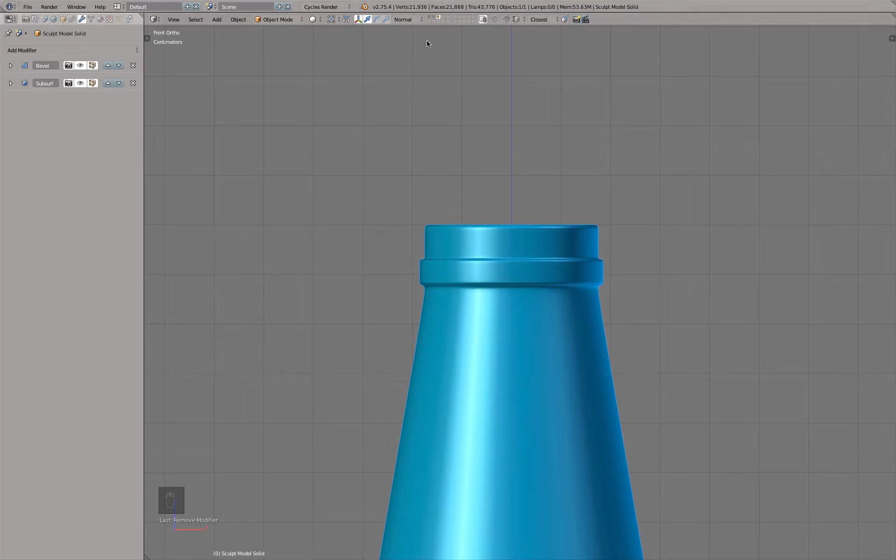So let's zoom to where our cap is, and let's actually turn on, for example, layer 1. Actually, we can just go to layer 1. So I can, for example, see where all the horizontal lines are, because essentially the cap has to flow over it and fit on the bottle.

So what we can do actually is, for example, start by copying out one of these rings, because then we have already the correct height, and then we start adjusting the scale, make another copy, move it around, and then step by step actually build the same framework for the bottle, just for the cap.

So I start actually with this ring. I can press Shift D and then press Escape, so I do not move actually the ring. Press M and then move it to the next layer below. So I simply have my wireframe model for the cap on a different layer than where the bottle is. So this lower ring, for example, is already perfectly positioned where it might be. We'll see later for the fitting.

But for the moment, let's actually change first the size. So this one, for example, should be roughly 38.2 millimeters and 38.2 millimeters. Okay. And then we can make another copy of this one. So Shift D and again Escape. And we change the dimension this time to 40.5 millimeters to 40.5 millimeters. Okay.

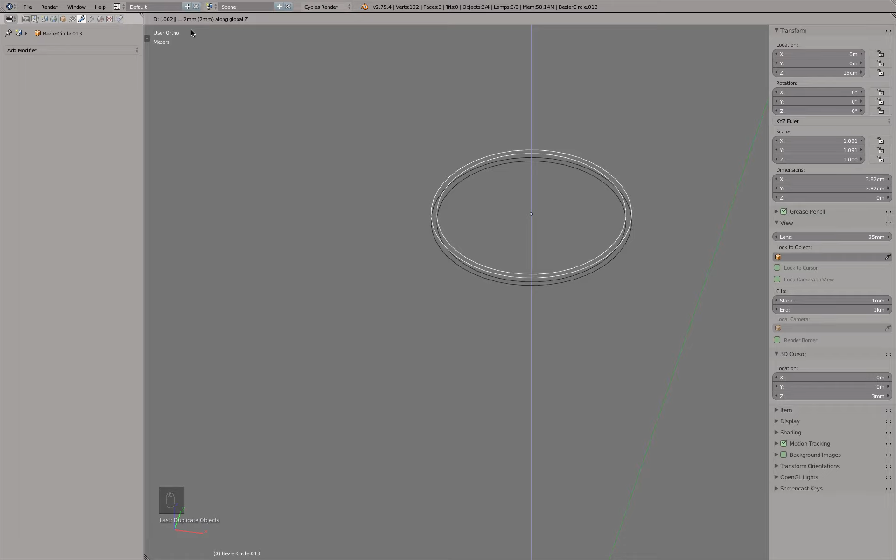Then with Shift and left mouse button, we can select both. Press again Shift D and Escape. And then actually we move this roughly 2.3 millimeters up. So G, Z, period, and then 0, 0, 2. So just pay attention to the values you see up here. Because a meter is the main unit, and we want to move it up 2 millimeters, you have to type in period 002 and enter.

Perfect. Let's go into side view. You see that this is kind of like the bottom part of the cap. Now, this ring I selected right now, we can make another copy. So Shift D, Escape, and then, for example, this one we have to move up.

Then the whole object is 10.8 millimeters high. This one is already moved up 2.3 millimeters, so we have to move this one up 7.5 millimeters. So G, Z, and then 0, 0, 7, 5. Okay, so let's double check.

I'm going to select this lower line, Shift D, and then Z dot 001. No, actually, this is 1 centimeter. Oh no, actually, yeah. And now we can see this one got miscalculated. Wah wah. Simple math failed, so not a big deal. We can simply move this one up.

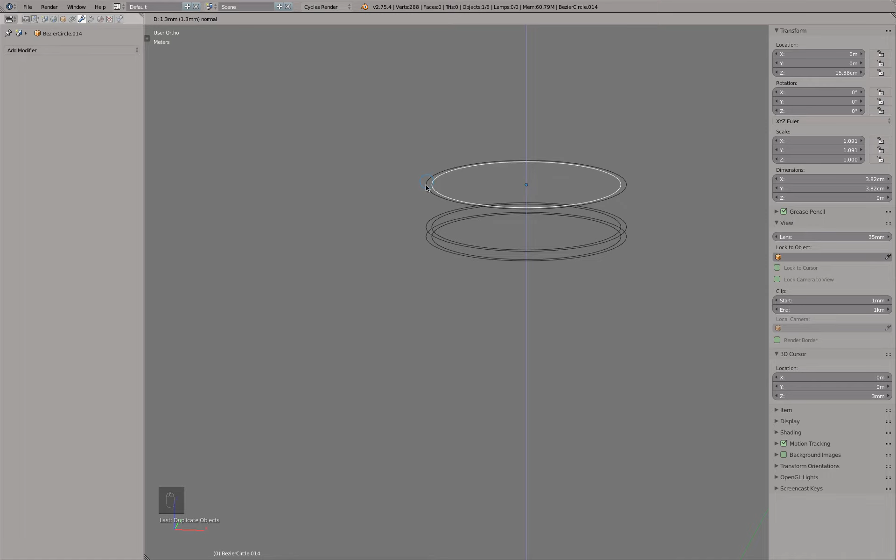So we have actually vertex select turned on. I click on the blue arrow, move this one up, move my mouse to this other ring, hold Control key, move my mouse till it snaps to a point, and then I release my left mouse button. Then I can release the Control key, and good. I can select this one and delete it. Okay, perfect.

So we have, for example, up here another small ring that goes in, and it has a dimension of 30 millimeters. So again, Shift D, Escape, and then here we type in 30 millimeters. Okay, and this one goes down actually a little bit. So let me measure the distance, which is roughly 1 millimeter. So again, Shift D and then Z, and now we type in -0.001. So you see it goes down 1 millimeter.

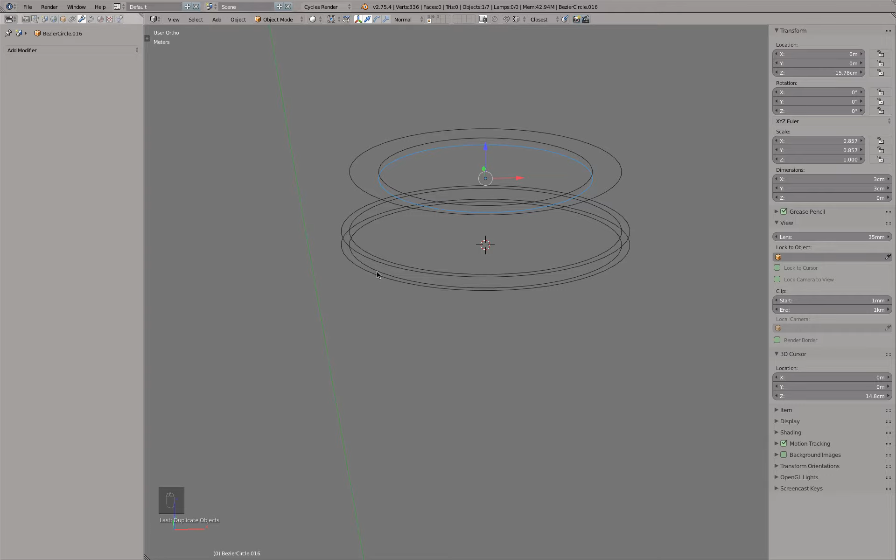Okay, so this is again kind of like the framework for our ring. Think about those like hard edges we can use as a reference to shoot for. Now we have to build at least one cross-section view. We can select one of the lower rings and then Shift S cursor to selected, so that my cursor is right at the same horizontal level and also centered at the ring. So when we create our next object, another spline, it will be perfectly centered inside the ring.

So now we can go ahead, Shift A, curve, and let's add a Bezier. Zoom out a little bit, go to top view with 7, Tab, select everything. Actually, this might be good to show two different ways how we could scale everything flat.

So I could select this one, point select is turned on, G and Y, move this one down, hold my Control key, move my mouse to here, and you see it snaps along the y-axis to the same height where this point is. Okay. I could also, in object mode, and you see here this one is 22 centimeters, simply say 0, then this is actually artificially compressed. See the scale factor is 0 there, and then I go to Object, Apply, Scale. If I go into edit mode, it's also flat.

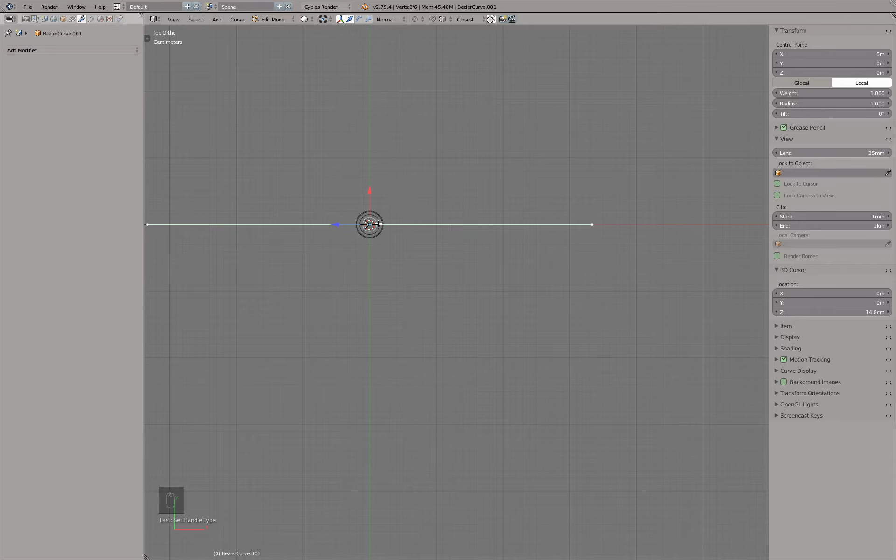The last step with V is the one I wanted to use anyway, because I want to work with linear lines first. So my 3D cursor is still at this position, and I can click on this point and either inside transform control points write 0, so it snaps to the same location where I positioned my cursor, or I could say Shift S, selection to cursor. There. Then this point I move in a little bit more, and then let's zoom in.

Let's focus on it, and here is a point on my ring, so I can click on the arrow. Also, you see I have normal turned on, and with normal the Z is always along this line, and then you have X and Y, and this all flips based on what setting you're using. So let's undo this one. So now I have global. Now I can move the red arrow till I hit this area, hold the control key, release my left mouse button, and it's snapped. But I really love working with the normal when I work with splines, so I switch back to this one.

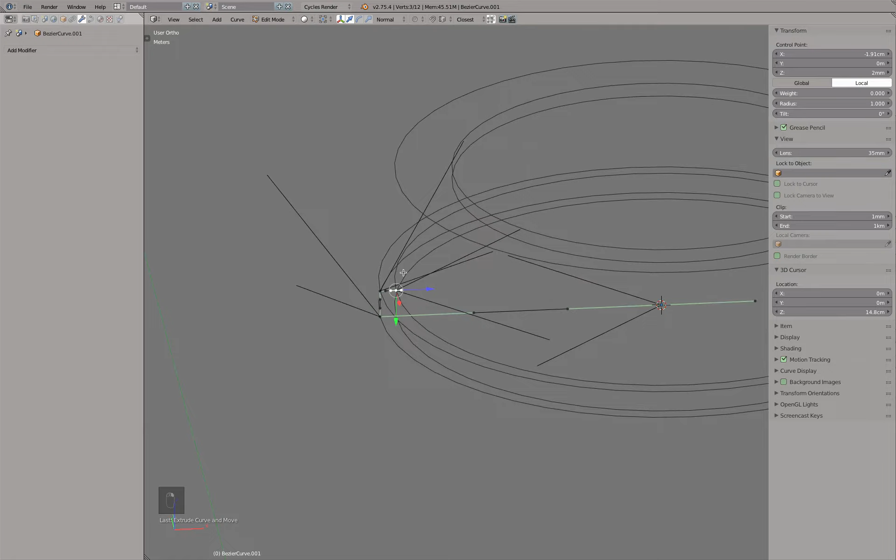Now I can press E and then Z, hold the control key and snap to it, and press E and X, hold the control key and snap to it. And this perfectly worked out because all these rings are either above each other or next to each other. And then one E and Z, hold control, snap, E and X, control, click, E and Z, control down. And now the next one should be where the 3D cursor is, but roughly here.

So EX. Now I could, for example, say SX and 0. Whoops, but I have to go first to 3D cursor. So I scale to this 3D cursor, but only along the x-axis, and 0 works. Or, because those are 2 steps, I could simply go to control points, 0, there. Perfect. Okay.

This one will have a small radius. So I could visualize this so it's a little bit more helpful. Create a circle. I think it is roughly a 2 millimeter diameter. So I could press F6. I have a different key mapped, so that's the reason why you don't see that pop up. And then I type in radius 1 millimeter because that's the dimension for 2. And then rotation 90 degrees, so it's flat on our screen.

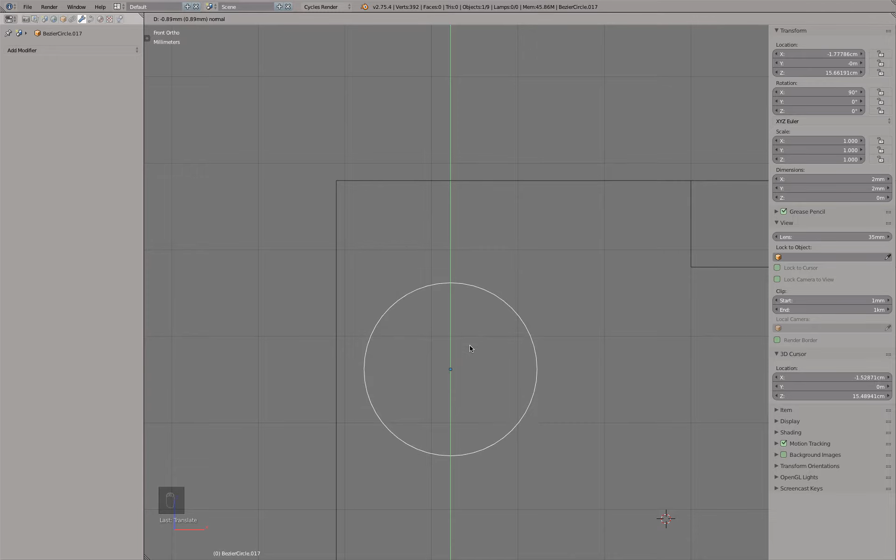Where is it? Where's the ring? Oh, 1 meter, 1 millimeter. Forgot to enter this one. Okay. And then I can bring this one into position. I press the Y arrow, hold the Control key, move it to this corner. It snaps. Press the X key, move my mouse to here, hold Control, and release the left mouse button. Then I release the Control key. And you see now we have this one positioned. This is very helpful because it tells me how I have to bend certain parts of my curve to get this result.

So I think now we can go ahead and start sculpting our profiles a little bit. For example here, this point I would like to move over to the right by 1 millimeter. Currently I can't really use the normal view. I could go to global and push it over by 1 millimeter. But while still with the normal widget active, I simply could write GX, so move along the x-axis, .001, 1 millimeter. Perfect.

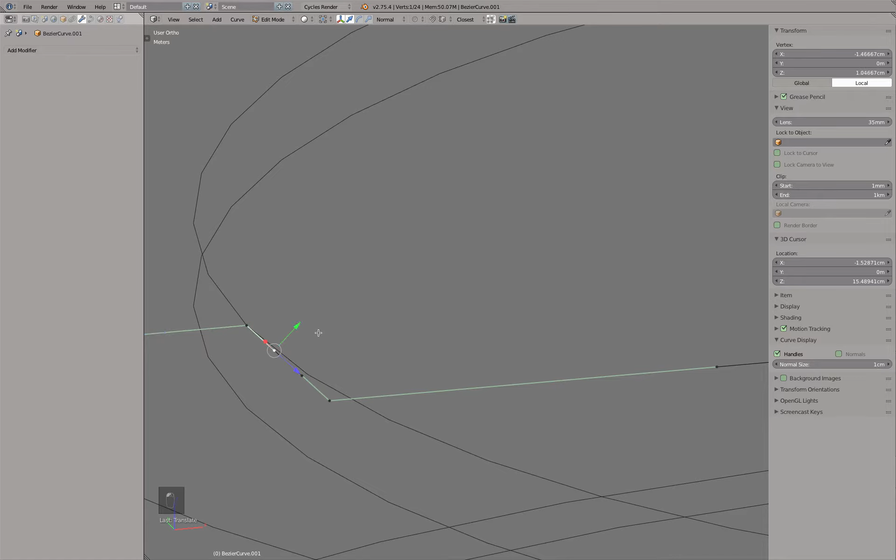These 2 points I would like to be aligned to those handles, because currently you see with vector we get linear transitions. And if I select this one and say aligned, you see it aligns it with the green line. What I can do now is I cannot move these points up and down, but I can drag them out further. But the way it looks right now is very pleasing. It's a nice S transition, so I keep it. Good. For example, here I would like to have a ring. What do we do? It's not really a big deal. We have to add another point.

So one point here, one point there, and then we also work with the handles to sculpt that shape. I'm going to select these two points and press W and select subdivide. You see, this added another point, and then this point I have to move right to where this position is, basically at the midpoint of this arc on top.

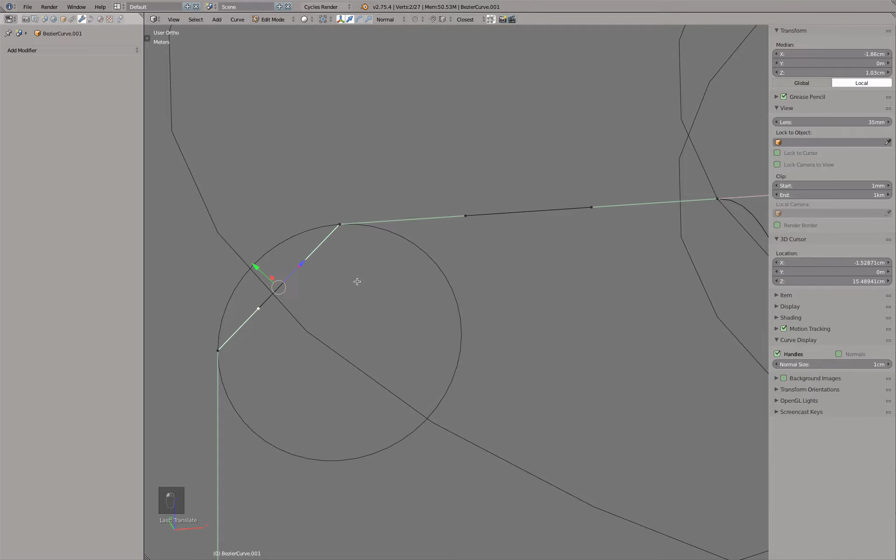So either G, X and then Control, and then G, Z, and hold Control and click. Perfect. And these two points, select, align. It's going to side view because it's not necessarily perfect yet. So I would like them maybe to come in a little bit closer. Oh, there we are. Maybe this one will tick up, maybe tick back. This looks good.

If, for example, you would like this to be more evenly spaced out, see, I was actually moving each one at the same pace. Let's see what happens when we press S. You see, because they're aligned, they have to stay aligned. With S, I scale them towards each other, but they can't really look at each other, so I simply scale them in or out. And it's pretty fantastic, it works with both at the same time, so I can nicely scale them and get this nice arc.

Really good, let's take a look down here. Actually, I made a small mistake. This one doesn't even have to be there, it actually has to go more there. So I need something circular, and then later the metal has to bend in a little bit. Let's see how we do this.

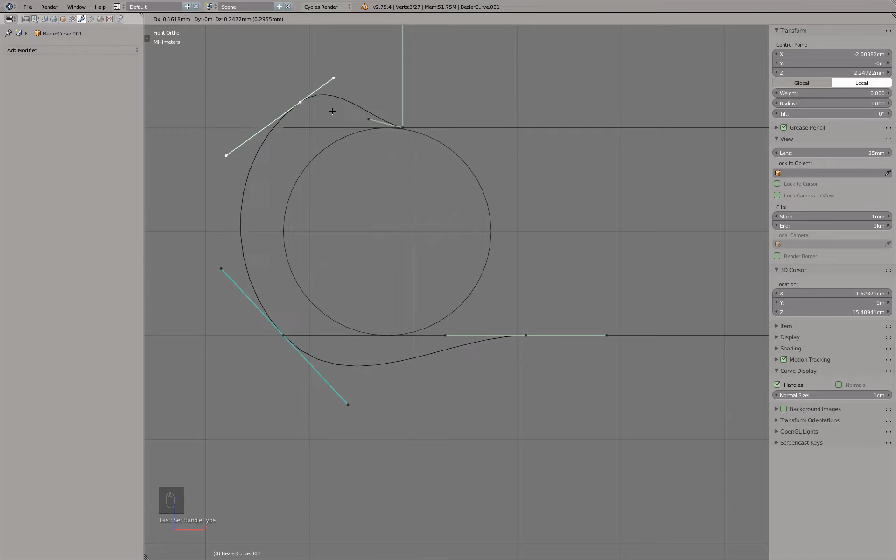I'm not going to make a copy, I'll just leave it. Okay, so you and you, maybe, let's say automatic. What does automatic mean? You see, actually the handle size adjusts automatically, you can only move the point, you can't really do much with the handle. Obviously, if you do, then you override the type of the handle.

This one here, I'm going to set to be aligned. And then this point, I slightly move up. Then I try to see maybe where I have to put these points, so I might actually get a nice kind of rotated circular shape. And it could work, or the automatic tool here doesn't work as I hoped.

Not a big deal, so let's override the automatic to align, so I can actually now rotate everything. This one here I push out a little bit, this one I push up a little bit.

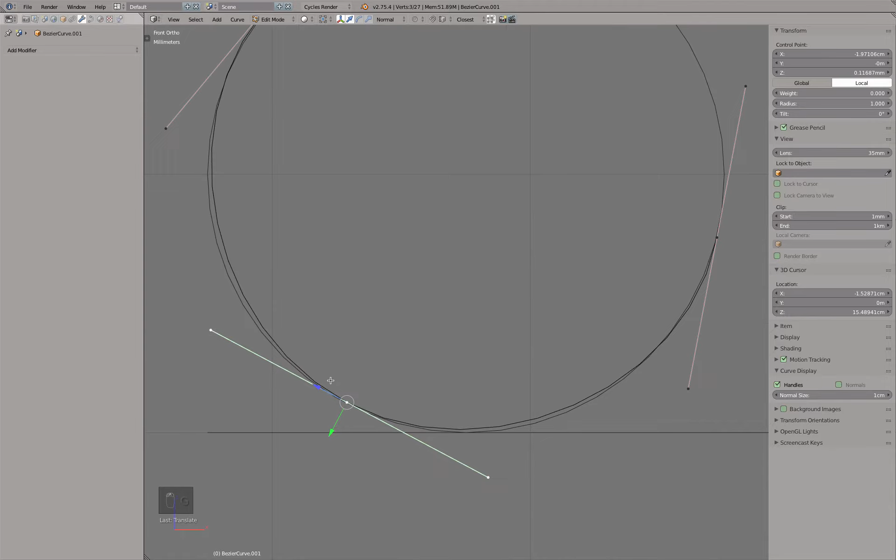No, this is a metal part, for example, that would be bent by a shape, so this will be machine made. We don't have to be 100% super accurate, we could simply maybe suggest the shape, like this. Okay, that doesn't look too bad. Let's preview the result.

With a solidify, with a screw command. Let's move this one actually, no, let's not move it to a different layer because it's still the profile. But with Shift H, we can hide everything else, and then we only see our cap. That is actually pretty good. So then we can turn off the screw modifier and remove it because the result is pleasing. With Alt H, we show everything again, and our first step, crafting the layout for the profiles, is done.

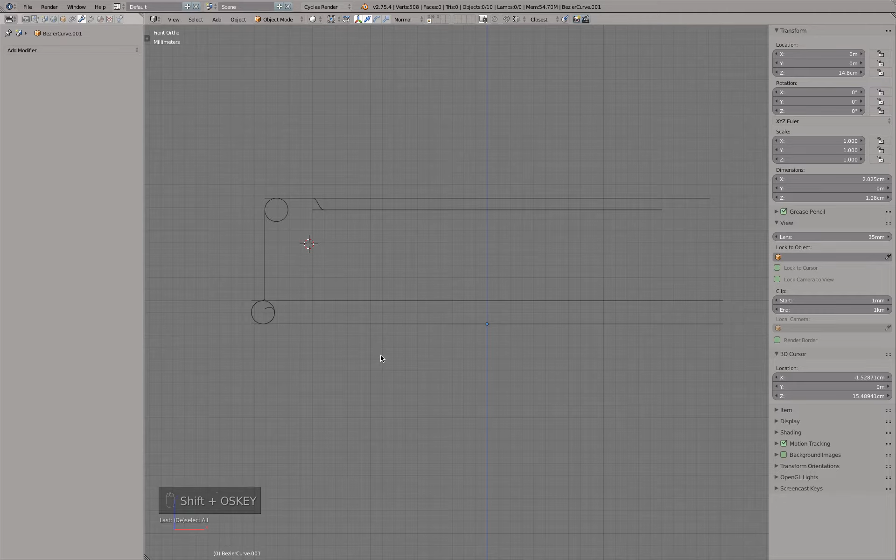We are now ready to generate the polygon model for more sculpting. Again, the reason why we do this is we can use splines to quickly create nice shapes and flows, and then even use the screw feature to, for example, lathe it around the z-axis 360 degrees. But we can't really locally sculpt on those objects because they're not really there, they're more interactively generated.

So we have to rebuild this one. Or actually, what we can do, I'm going to show you this in contrast to the way how we build the model. We can also convert this object already into a polygon model. So I'm going to press Shift D, Escape, M and 4, to make a copy. With Escape we do not move it, and then with M and 4 we move it to layer 4. And we have this object selected.

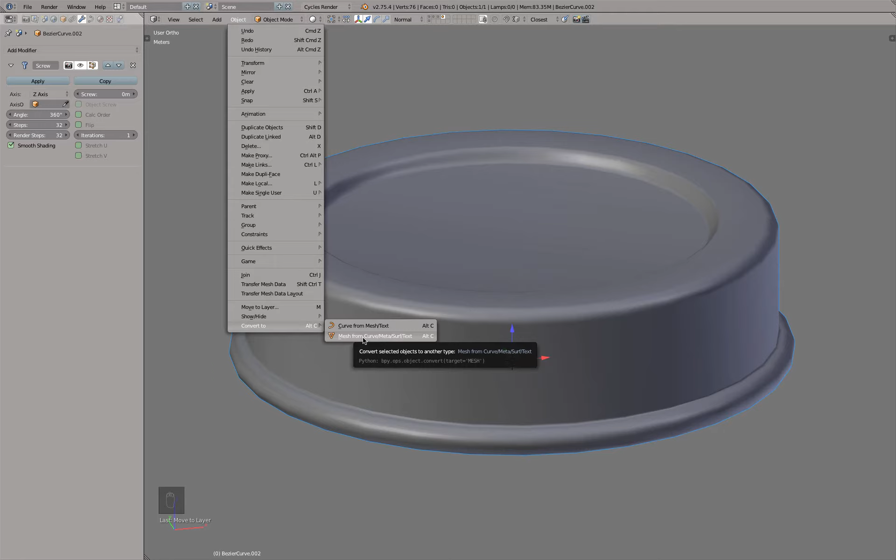So, for example, here I type in 32 and I go to Object and say Convert, and then Mesh from Curve. Let's turn this one off for the moment. Okay, and then go into Edit mode. There's our design.

It doesn't look too bad. The problem, however, is this is actually very, very dense, and you see also here, this is very dense. If at one point we want to change a small part, you have to work with all those cross sections and evenly adjust them. That's possible, but it's going to be very labor intensive. So this approach doesn't work, but that's not a big deal.

Simply let's undo everything. What we have to do first is I'm actually setting the levels to 6, because this is going to be again the low resolution I only need for my subsurface modifier and later in T-splines in Fusion to simply get a nice circular shape.

And then we go to the curve data, and this one we actually can set to 2. From the top you didn't see much, but let's take a look at here, and you see when I set this to 1 or 2 or 3 or 4, you get more steps. So this is similar like the subdivision view levels, but just for NURBS surfaces.

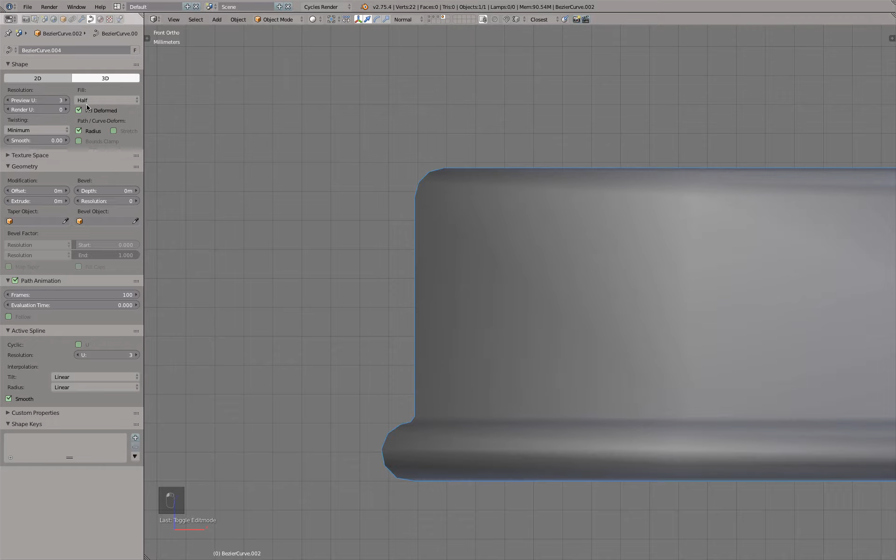And this result, for example, with 2... maybe let's go with 3. That might be not too bad actually to work with.

Okay, so now actually we can go to Object, Convert, or you press Alt-C, and then let's go into Edit mode, and there you see what we have. Okay, not too bad. Good. We have to add a subdivision surface modifier, maybe level 2 or 3 for the preview. Let's turn on projecting the cage onto the mesh, and let's take a look at the side. No, doesn't seem to have any issues.

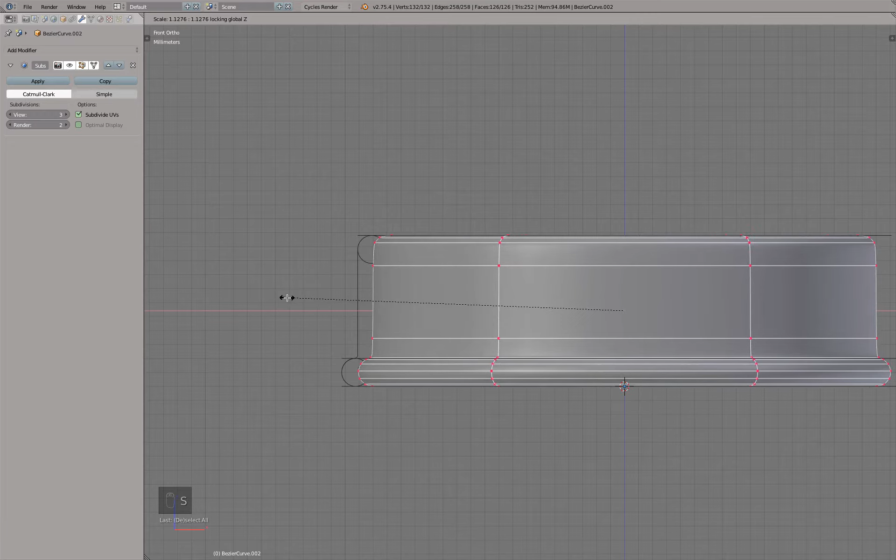On this layer, let's turn off the screw modifier for the curve, and then let's make an overlay, because we will see that this object actually shrank, and that is because with the subsurface modifier we only have 6 vertical cross sections. It simply will shrink it down dramatically, but this is not a big problem. We can simply select everything, and then we press S and Shift Z and scale it out so we get a close match again.

Okay, perfect, or nearly. So you see actually that it doesn't necessarily fit everywhere as good, and I have to scale all these points right now, so possible, but this might actually be a little bit too much work.

So what I simply do, I make myself again a copy of the original one, and then set this back to 6. So view this one, and then here we say 2 in this case. 3 was just a tick too dense. And then convert. So now we have a lot less points.

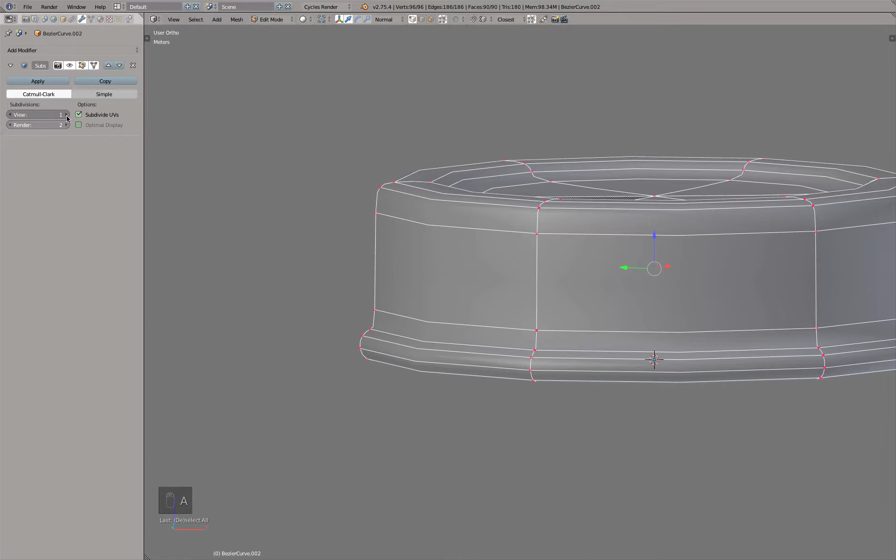Let's show this layer as an overlay. A, A, S, Shift Z, move it out. Yeah, so now there we have less points actually we have to take care of. Okay, so what we can do now is, as you can see in a low polygon cage, is vertical, but if we project it onto the subsurface surface, you see this gets crooked.

Not a big deal. When you have more than 2 points in a line, it will actually straighten the surface. So you see if we add, for example, a loop cut and a loop cut, this area gets straight, and then there it starts bending out, and then there it bends out. So let's go down to this part here. Let's maybe select all this and see what we can do to maybe help a little bit.

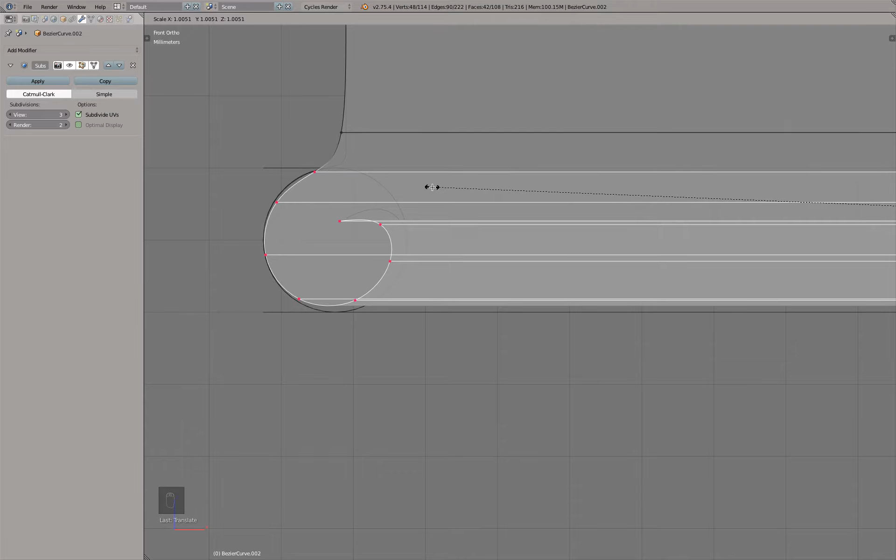So G and Z to center it a little bit, and then S, yeah, when we just scale it out a tick. Actually, those, for example, we scale inwards. Oopsie. Obviously not this way. Yeah, there and there.

So I select those edges and then I go to mesh, select, and edge loops there. And then S and I shrink it back there. And for example, I can select this and this and then do the same, select the loop. And G and Z, for example, move it down.

Okay, this is actually obviously not 100% accurate, but this is a machine part. And all we do here is quickly make a concept. And for this, actually, this result is pretty decent.

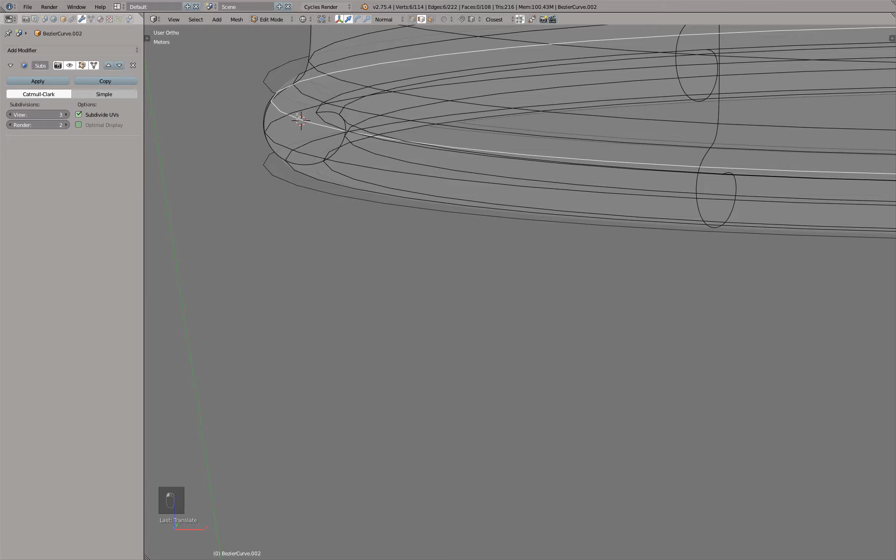With Alt left click, you can also click on the ring, or is it Control left click, and then G and Z move this one up. For example, let's take a look at how these points are there. Maybe this point, actually, this complete loop I remove. Curious how this looks now. You see that will be a bigger transition.

That's fine. But now I can take this loop and actually push it down a little bit. Take this loop, push it down a tick. Take this loop, push it up a tick. There, then we get a nice soft transition. And maybe this one we scale a tick there. And this one maybe move up if we want to. And this one we can G and Z move up a little bit.

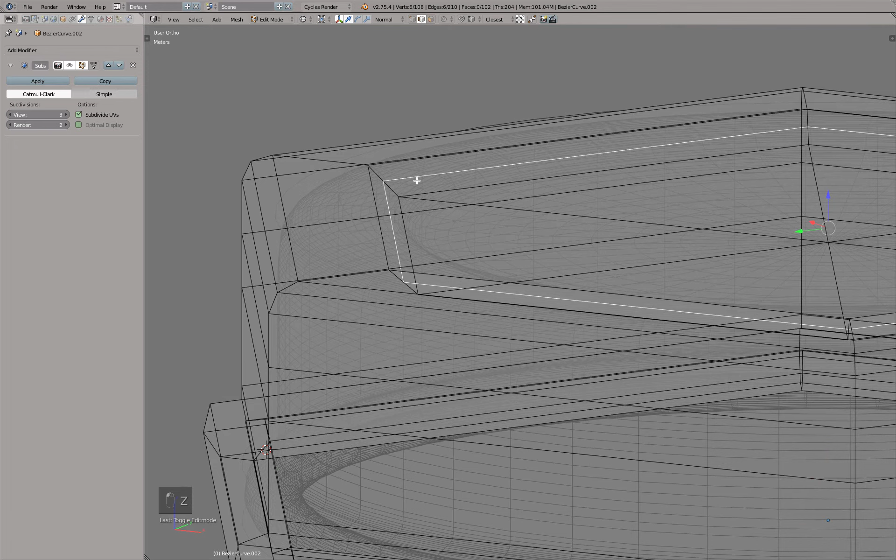Yeah, and you see that wasn't too difficult to quickly adjust. Let's take a look at this area here. So we have this midpoint. We can actually remove it, because what we simply can do is we add a small loop cut here with Control R onto this line, move it in there.

Obviously, if you do this, you want to try to make those distances kind of equal. Think about those as fillets there. Now we have a nice transition there. And this actually does not look very circular, so this is not very pleasing. Let's see what we can do.

I'm going to select this edge and completely remove it. Select this edge there, and then G and Z, move it up till we hit this point there. Select this edge, clean it out. Okay, let's take a look. And maybe this line I move up a little bit.

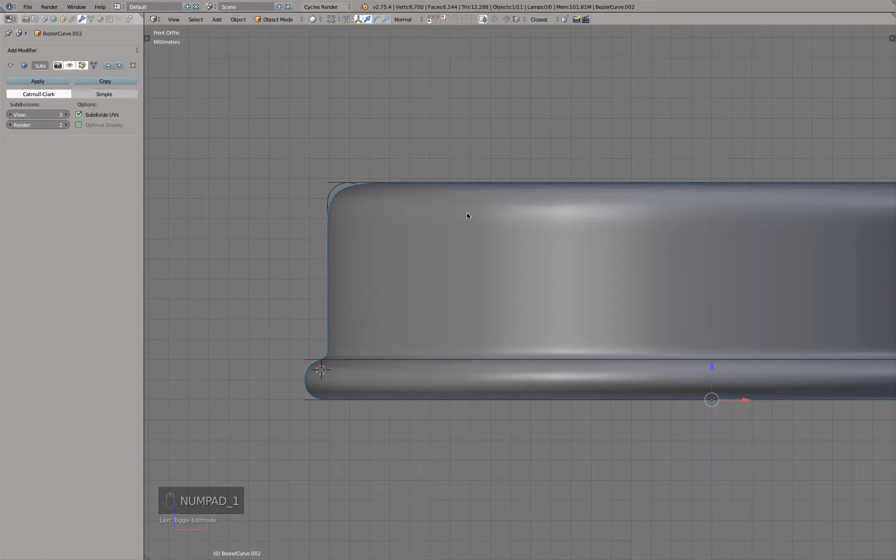So there are two ways now. We could either try to sculpt this part. We could select this edge, and then with the Bevel command, so this is Control B, and then you have to move your mouse away a little bit. And then with the mouse wheel, we can add subdivisions, more steps, to sculpt this a little bit rounder.

There, okay, and then with F6 we can open the dialog. And for example, here we could type in maybe for profile 0.6, so this maybe looks a little bit rounder. Up here, maybe I would like to have 2 loop cuts to straighten that top surface.

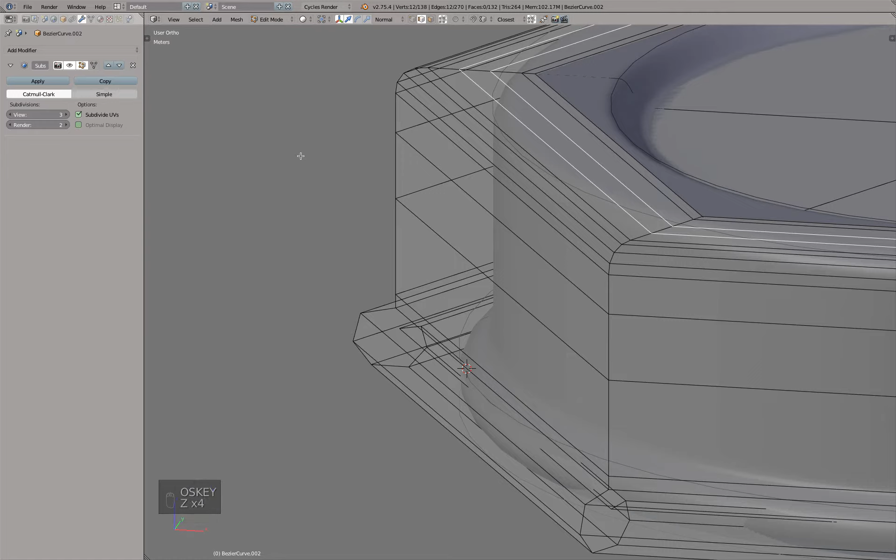Let's take a look at before. You see how this actually dips down, and then with the loop cuts it's a little bit straighter. Okay, so that's one way. But the problem is I have now added all these loop cuts or subdivisions, and a smarter way would actually be select this edge and...

Let's set this weight to 1, and then before we do the subdivision, we add a bevel modifier, but just for the weight, with 1 millimeter, maybe 0.6 profile. You see, this is actually the same command like when we add it directly to the mesh. And maybe 0.8 millimeters, no, 0.9 millimeters, if we want to hit that profile pretty closely.

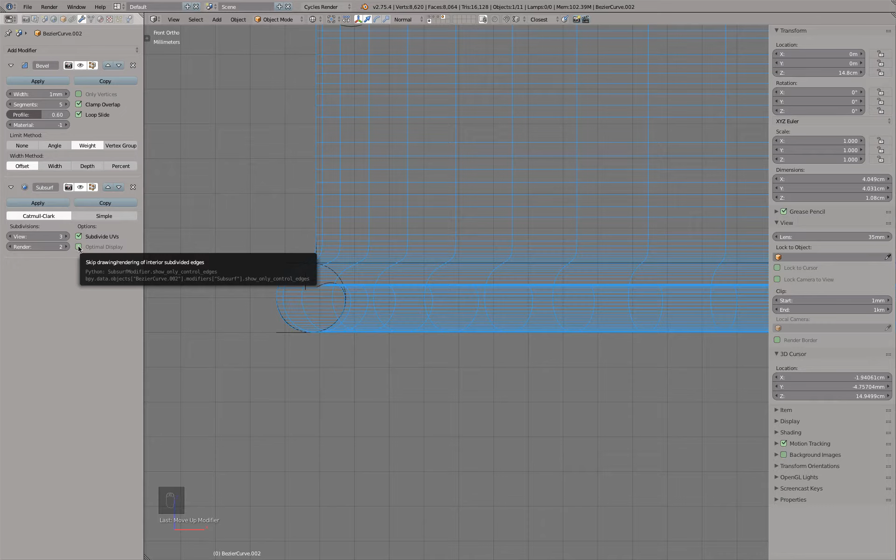1 millimeter. Yeah, okay, this looks actually pretty good. So, as a last step, since this mesh looks pretty dense, we can click this option here, optimal display, and then it shows you less wire lines, so it's a little bit easier on your eyes.

And now we could add a solidify modifier to give this part also a thickness, maybe 0.2 millimeters. Let's take a look at where this one is being inserted to. Yeah, so this actually goes to the inside. You see here with offset, this grows to the outside, this grows into the inside. Let's check those.

Yeah, this is actually, ignore this for the moment, we will fix this when we need to. This is, however, actually a pretty good result. And there is actually the problem: these points actually are not joined. You see here they overlay.

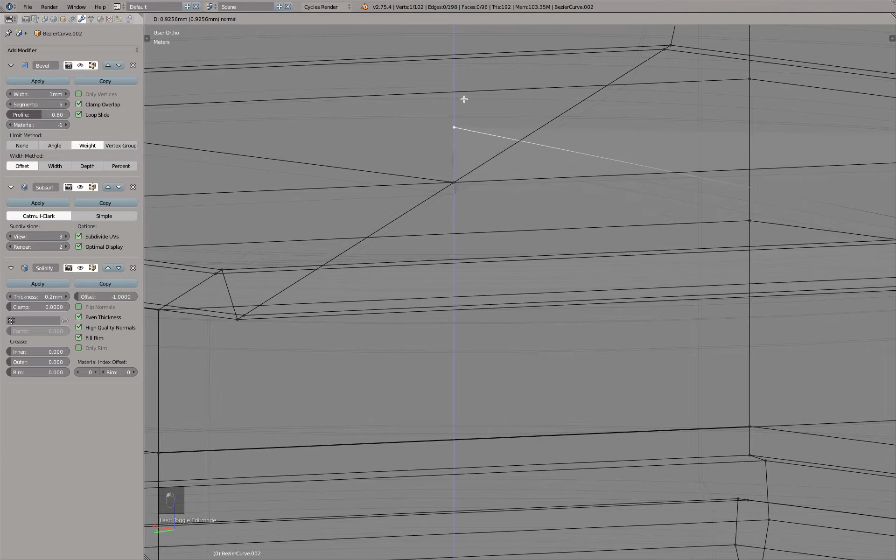But for the moment this is fine, we can keep it this way. It's exactly the way how I want. I will come to this at the end of the project to optimize the mesh a little bit. Okay, let's keep the cap this way, and then we can save it.

But before we do this, let's make one last check. We have to see maybe the height position. So we see here the curves we created are all a little bit too low. Now we can select everything, go to the bottle, and move this one up. And then I pay attention to where's my bottle and where's, for example, this arc. Should be maybe somewhere here.

There will be a little bit of compression material in between. And there we are. So I think this is pretty good right now.

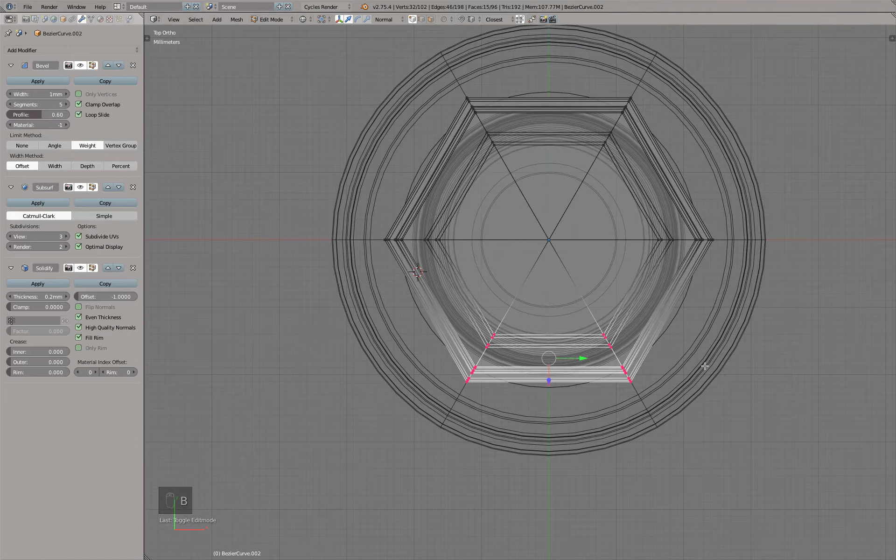If, for example, we would like to see in edit mode half of the model, we can select this part of the model for the cap and press H to hide it. And then you can quickly see kind of like a cross section. Looks pretty good. Okay, Alt H to show it again. And that's it.

At this point now we can go ahead and start working on the threading. Let's go back maybe to here for the moment. And I simply select this ring, Shift S cursor to selection, so I could quickly position my 3D cursor to there. And then let's go to the bottle so we can see it from the side.

And I shift click layer 5, so I can see what's on layer 3, but I work on layer 5. And I'm going to add a plane, and then sculpt it into the shape I need for the threading. And then we're going to use the screw command for the threading. So Shift A, add a mesh.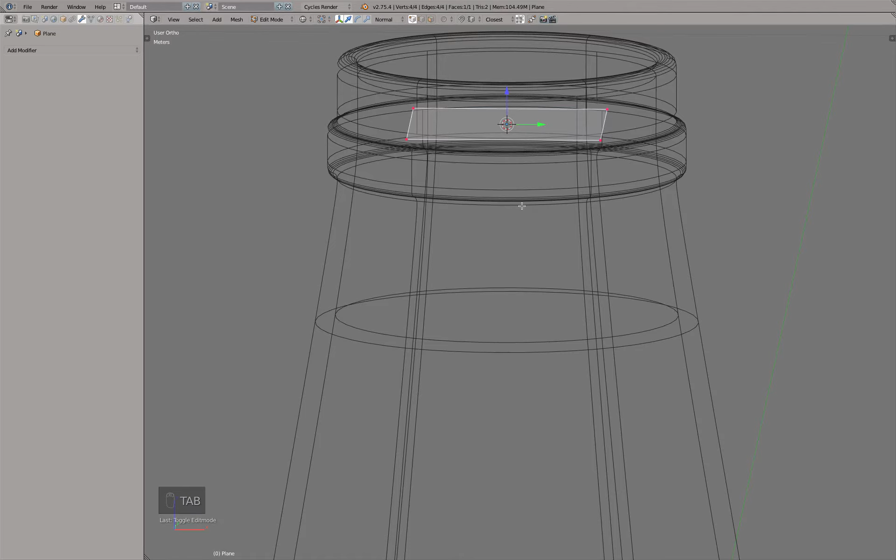And this plane is going to be very big, so you can press F6. Or alternatively, you could also go to the tool panel and, for example, down here type in 1 centimeter there. Okay, and there is the plane. And then I could press the tab key and, for example, RX90 and rotate the mesh.

But the mesh is pretty big, so the threading is roughly 2 millimeters high and maybe sticks out 0.5 millimeter in this design here. So to do this quickly, because this is more or less a squarish format, we could just go to Z in object mode, type in millimeters, and maybe dimension, we type in 0.5 millimeters. Now, because we have a scale factor applied, I don't want that, so I go apply scale.

Okay. So why did I do this? Very easy. I can go to edit mode, and for example, move this one out to there. And then I see, for example, when this is 0.5 millimeter, how far does the threading stick out? And another 0.5 millimeter then actually already reaches this cap. So maybe in my case, instead of making it 0.5 millimeter, I actually will make it maybe more something like

0.75 millimeters. So I can select these 2 points, and then I press GX, a little bit of math. So currently 0.5 millimeter. I want to add 1/4 millimeter, so 0.00025 minus. And if we measure this distance, it says 0.75. There you can measure the distance, and this is also 2 millimeters. Okay, good.

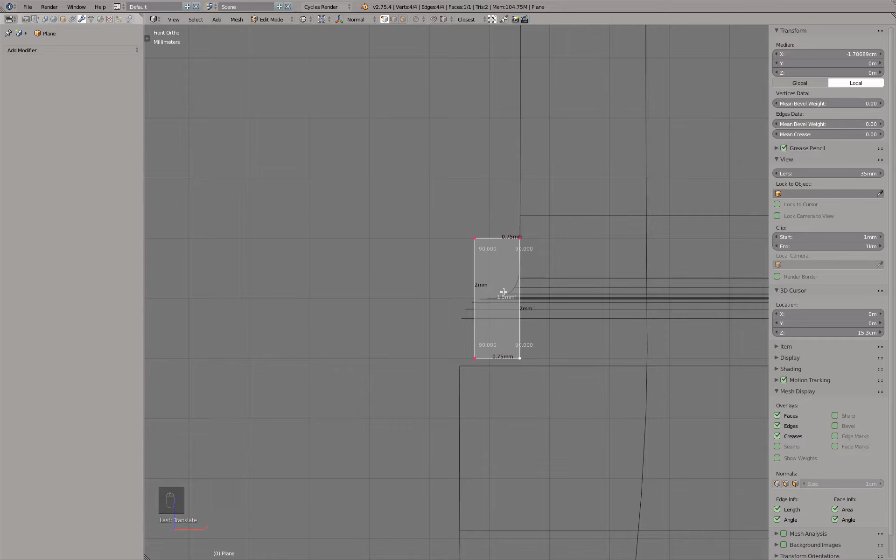So you find the measurement tool for linear lines, for example, inside the mesh display, and you can just click on 2 lines and then it measures it. You could even, for example, measure angle and, for example, the area of a face. You see all those are 90-degree angles. So it's a pretty nice, good tool.

Okay. So in object mode, then I move everything up for the moment to there, and I'm going to do the following. I'm actually going to make a copy. So Shift D, and then for example this edge I might actually remove. So I keep this maybe as a visual reference, and then you see there are 2 objects now. So the one that looks like a C,

and maybe to make everything a little bit easier to distinguish, I select all these points and then I press Y. Y is actually the split command. You don't necessarily see much of a difference, but if I click now on an edge and then press Y there, and then when I press S, you see you can actually scale those lines apart. So here I scale those S and X along the X-axis, and you see now this more or less looks like a nice layout. So I can use those as guidelines. So I always know where, for example, roughly my 0.75 marker is.

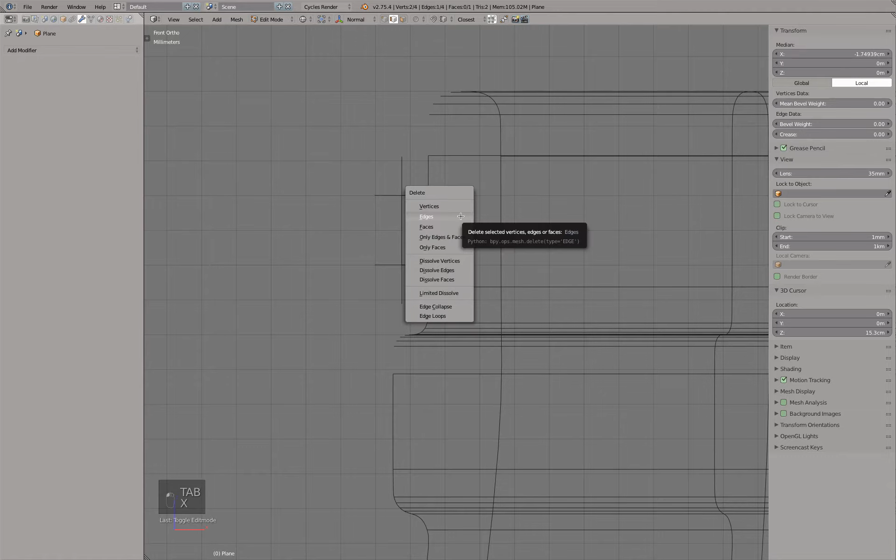And then I can go back to the first object I created. And for example, this edge, we also can delete this edge. For example, I could maybe scale down a little bit so this tapers a little bit. Yeah, so let's start this way. Good.

So to create a threading or a thread, we basically can use the screw command. So it looks a little bit cleaner, let's set this for the moment to 64. And here is the screw command. So this basically now decides the vertical offset. You see 1 millimeter, so half actually the height, 2 millimeters the full height, so it's like a 360-degree spin, and then you see it stops where the other one starts, hence 2 millimeters. If we, for example, type in 3 millimeters, then let's go to this view there, we actually have the perfect space for the other threading to fit in.

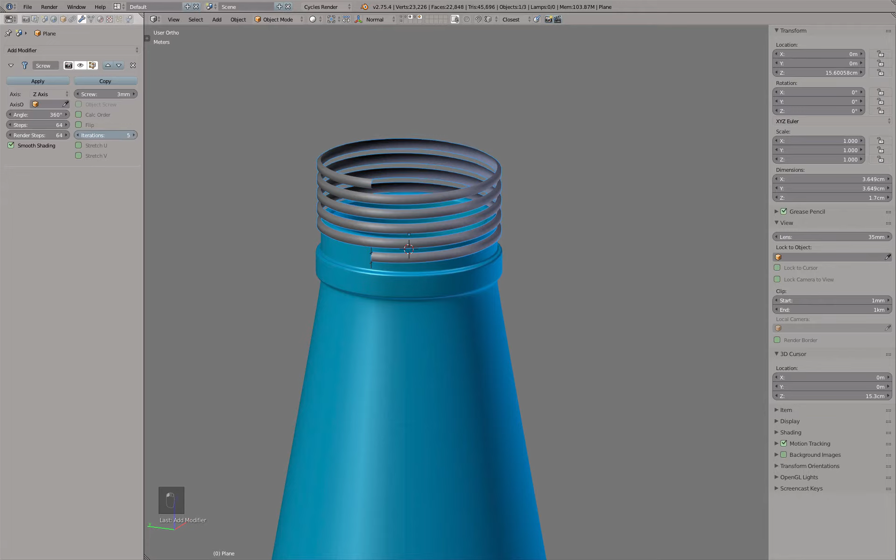Okay. Now we also have different iterations, so if we need multiple threadings. And we can, for example, also change the amount of degrees, 180. So with 180 degrees, it's just half a spin around it.

And it's really important that your object center is at the center of the bottle. So that's the reason why I first created my mesh at the center of the bottle, and then in edit mode I moved actually all the vertices outside. So I had my object center point already positioned. And in case the object center isn't positioned correctly, let's maybe do this as a quick exercise.

Let's go to here, plane, RX there, and let's quickly scale this one down. Let's make a dummy threading there, and there, and there. Okay. So let's move it to there. For example, you see this is also not on the x-axis. Okay. Let's add the screw modifier there. And there you see, it doesn't really fit correctly, not the way we want or need it. So now we could go, for example, into edit mode and say all those, I think with Alt 0, we can set to 0 of the object.

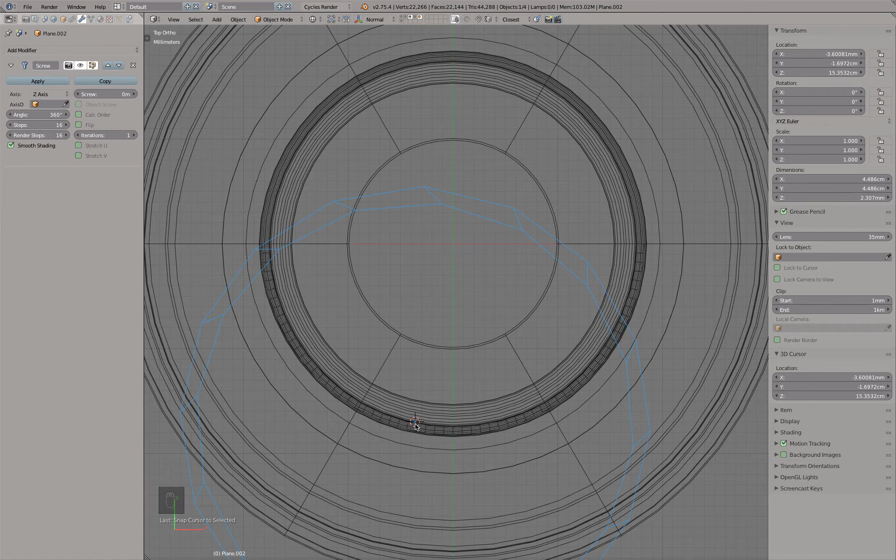Let me check one thing. Yeah, okay. Or for example, where the object point is, Shift S in object mode to the object origin in edit mode, then switch to 3D cursor and then SY0. So you see we scale it down, and then we can actually move this object simply to the correct position. So X and Y 0. There, now you see it's centered.

And then we can comfortably move it up and down along the Z-axis. And then from a side view, we can simply move this one out there. Okay. So I know actually that we have 4 of those threadings and they slightly overlap. So if we, for example, make a 90-degree threading, then actually the next threading below would start and then go to there, and then at that position the next threading would start. But they overlap also a little bit at the ends.

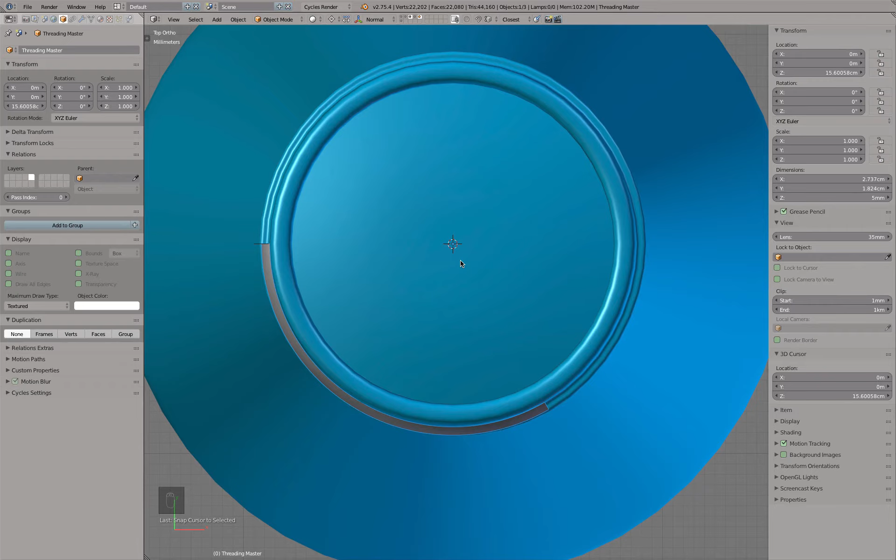So maybe instead of 90 and not 180, we have maybe something like 120. Okay. So I'm going to set my 3D cursor to the selected in object mode. So I center at the object point for this first threading, and I'm going to name this one threading master, because that's just how I start sculpting. And then maybe Alt D, so we make a clone, R, and then 90. Alt D R 90, Alt D R 90.

So there you see actually now how all those threadings actually overlap a little bit. Perfect. So 120 might not necessarily be enough. So let's select those 4 threadings. Okay. And then Alt click. So you hold the Alt button and then left mouse button click onto angle, release everything, and then type in 140. And that should actually change the degree to 140 for everybody. And this actually looks pretty good. Okay, but they are touching here, so that's not necessarily ideal.

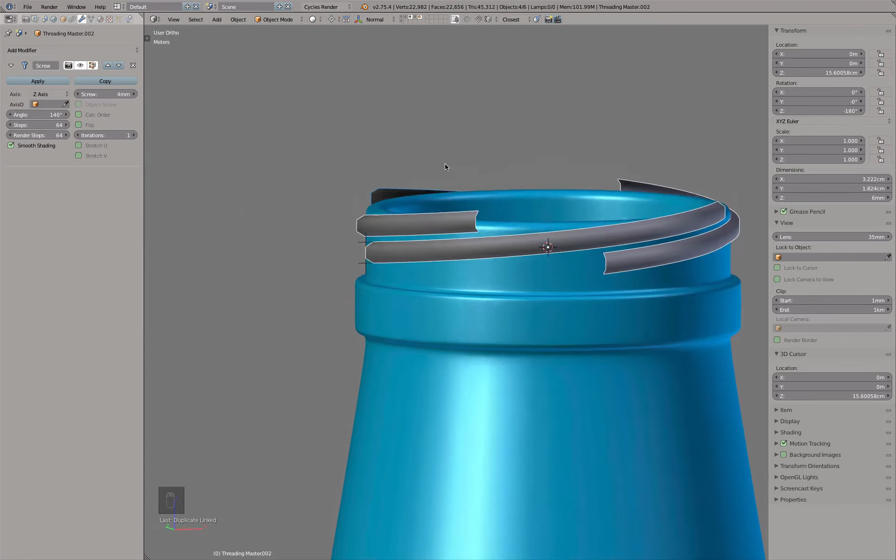So maybe here for screw, Alt key, left mouse button, 6 millimeters. And yeah, that actually seems better. Now we have a good gap between the threadings. But now the threading is actually too high, and the top of the end should be roughly 2 millimeters below the top of the glass.

So I'm going to add myself a small plane there, and then actually this plane I would like to scale up there, and if I put this one to 16 centimeters, it is roughly at the top. Yeah, okay. I would like this one to go down by 2 millimeters, and I could simply type this one in, 15.8 there. And this plane currently is visible all the time, it's shaded. So I can, for example, select these two edges, delete the edge, select these 2 points, press F, and then I filled it in, and I kind of have an outline of a rectangle. So it makes more sense.

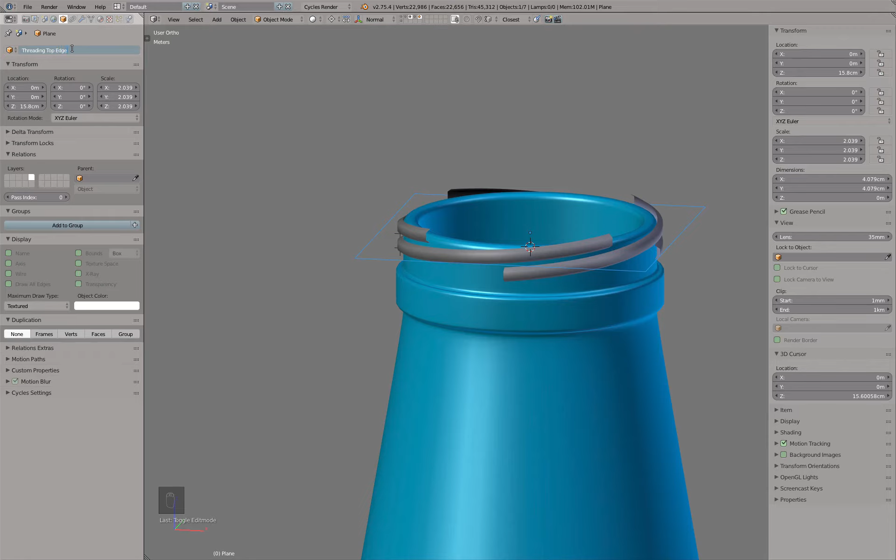I could, for example, call this one threading top edge guide. And for example, this other thing here, I could call threading side edge guide. And I just made up these names, so they're logical and make sense to me. Okay, so all these threadings, geez, I have to move down a little bit, because what I haven't figured out yet is actually for them to sink into the bottom part. So the threading should actually come out, but then stop there. So actually, as you can see, the vertical height is not good yet.

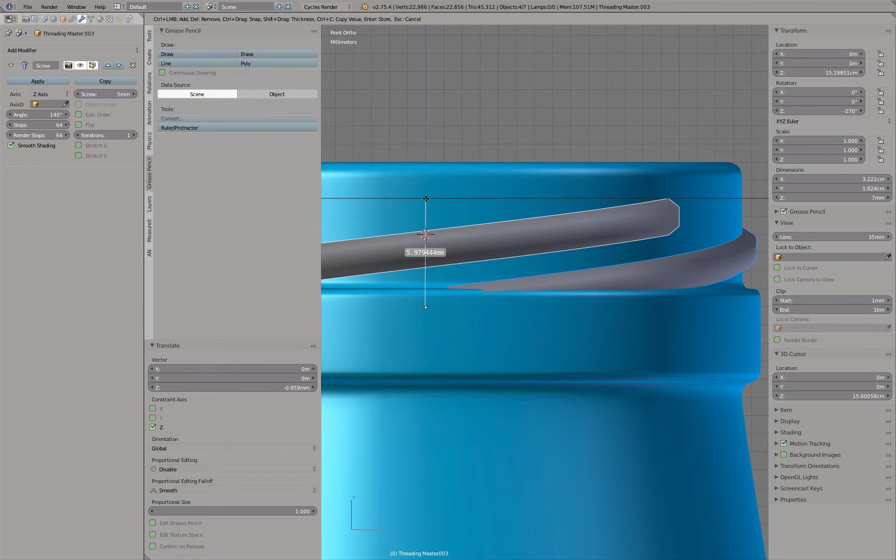So with all those 4 threading parts selected, I can go back, Alt, left mouse button, and then maybe try 5 millimeters. Well, there it is. Actually, that's pretty good. So you see from down here, it goes up 5 millimeters. That's kind of like the distance. So let's actually go to grease pencil, ruler, left mouse button, click, drag up. Yeah, kind of like 6 millimeters. Okay, yeah. Escape. Perfect. Okay. That actually looks pretty fantastic.

So let's save. It's your best friend. Nothing is more annoying than when the software crashes and you lost all your work. You also see that this guide actually horizontally doesn't match up. That's fine. But for me, what's really important is actually this vertical line.

So let me see, where's my master? There's my master. Actually, everything here I will select and maybe move on to the layer below. And then I simply select this one, and move this one to the top for the moment. And where's the master? There. Shift D, X, so I don't move it. M, layer 5. There. Okay.

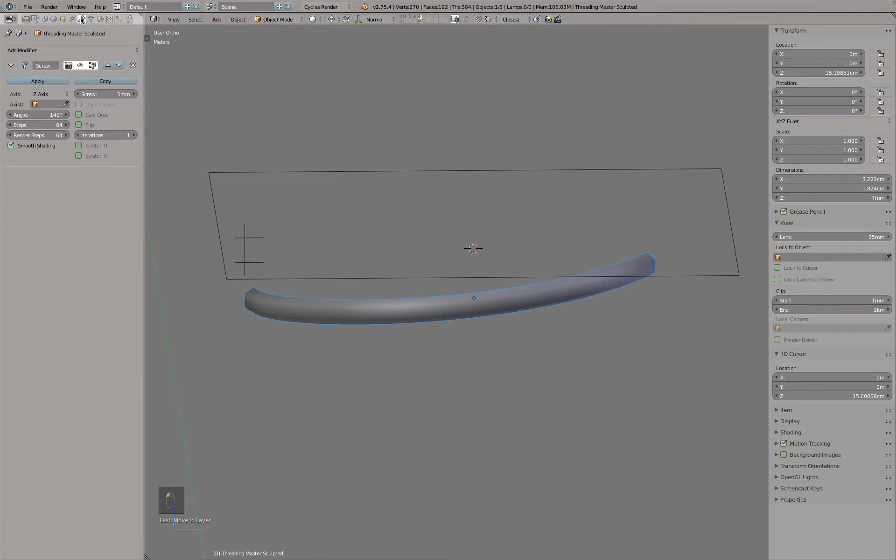And for example, this one I call now sculpted. There. Perfect. Okay. Good. So I would like actually to sculpt now my shell, so I can add, for example, a subdivision surface modifier, so everything is rounder, maybe a tick more, and you see how round this part is.

If, for example, those points I move closer together, so S and Z, I get a different profile for the threading. Instead of being more roundish, it actually is more pinched. That's nice. Let's take a look with the bottle, and we see that there's a small gap in between, not a big deal.

So what we're going to do now is actually the following. I first have to sink in the threading a little bit inside my bottle, but still also make sure that, for example, the threading sticks out also the amount of distance I need, so 0.75 millimeters.

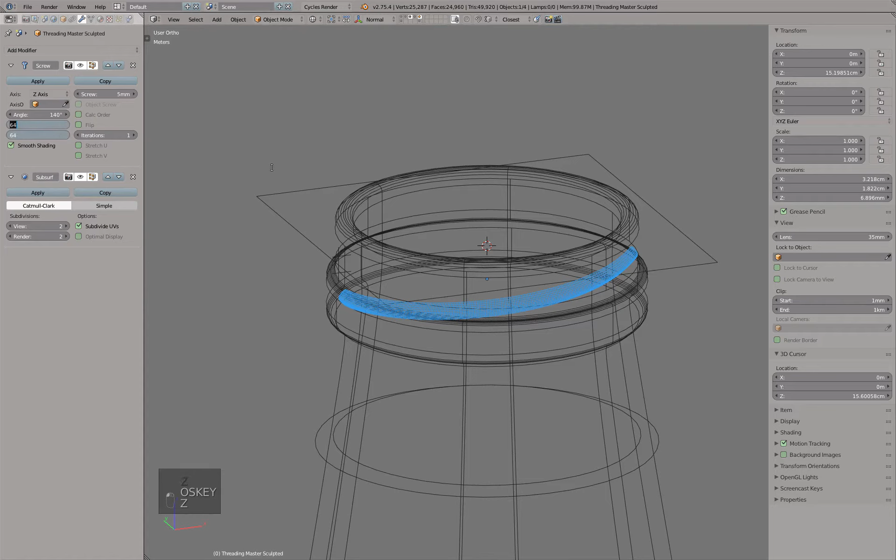And currently, you see I only have one cross section, I can't sculpt it. So I have to actually at one point apply the screw modifier, but I don't want to have, like in this case, 64 subdivisions I have to work with. Way too much work. So at this point now I have to see if I go maybe with 4, and apply this. Not really enough, so maybe something with 8.

And you see, based on how many subdivisions I give, also the threading changes. So 8 is actually, I think, a good amount in this case. Let's give it a try. Apply, and yeah, the points are okay. Good. So under it.

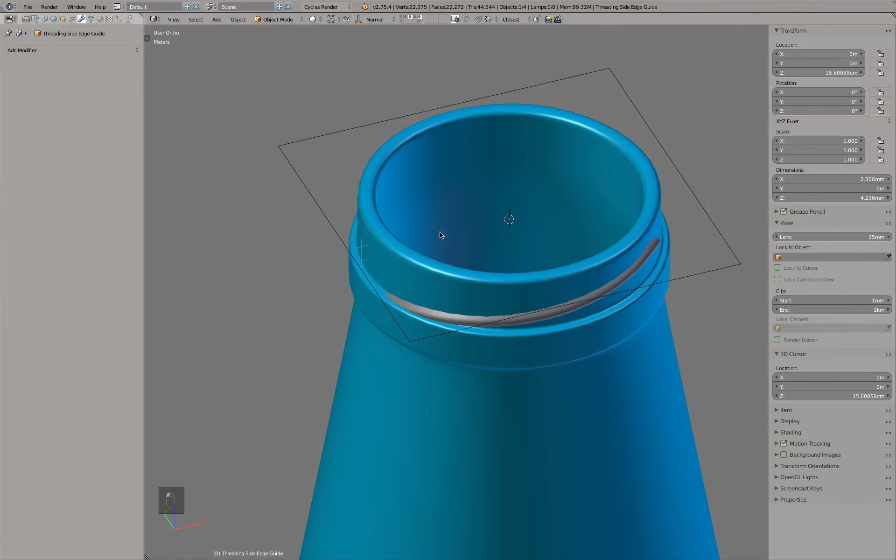But before I do this, you see actually with 8 subdivisions for the screw, and then the subdivision surface modifier, I can already see how much maybe the threading will shrink because I added the subsurface modifier. And let me see, maybe how could we do a good overlay? So this object, I'm simply going to switch to the bounding box, and then I rotate this one maybe to here. And the main reason is so I can actually take a look at it.

And then go into edit mode, and what I have to do now is the following. These points, for example, are they inside the object? So let's see. Alt B. Yeah, it actually intersects with the body, but maybe it should intersect a little bit more. So I will move them a little bit more into the bottle. Okay.

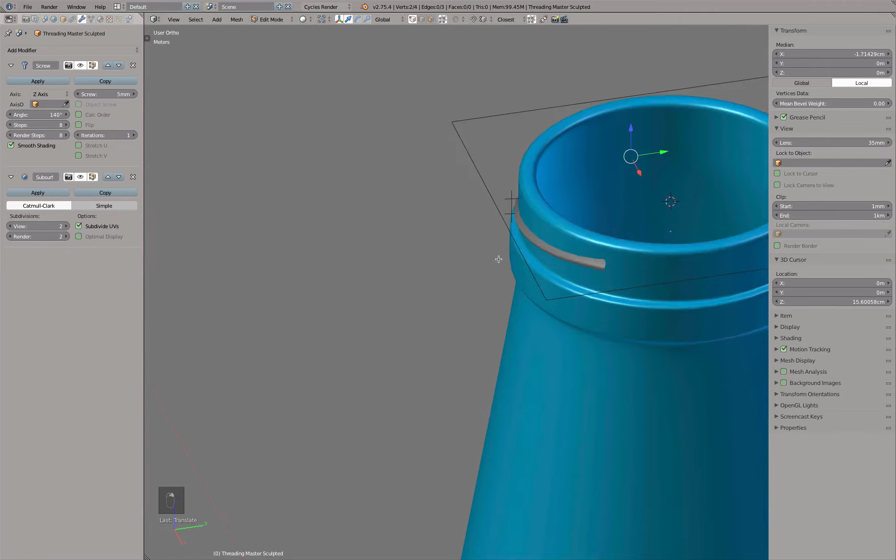But as we can see from this view, the rest doesn't stick out far enough. So then I select the other 2 points. And you see this is actually X. I could go to this view and then G and X and then move it to the correct direction. Maybe now here I go to this view and then again G and X. Yeah, that seems to be perfect.

Okay, another nifty way how to do this, instead of, for example, rotating this one a certain amount of degrees, we could simply say screw maybe by 64 steps there. Okay, and maybe this one we will give actually this color so I can better see it.

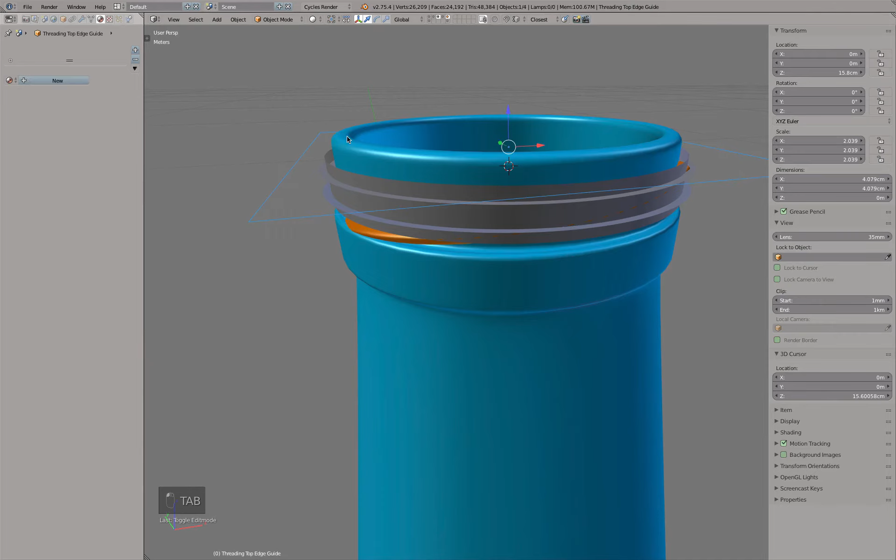And then when I go into edit mode and then I start pushing those out, I will see at one point it will penetrate that surface, and then now it's roughly where it should be. And then I, for this part, can simply remove that threading command. So it's more like a different visual check. Okay, perfect. So this is good.

So this part, maybe Shift D, escape, because I would like to keep a saved version of it. So I try to select the sculpted again. You see when you click on there are 2 objects and you can actually switch between them. Also when you hold Control, I think, which was it? Oh no, it was actually Alt. So Alt, left mouse button, you get a menu of what's actually under your mouse. Pretty awesome. So there, select sculpted, and then we move this one to the layer below, simply as a backup file there.

And then this one here with 8 steps, we apply, and you see nothing changes. But what we can do now actually is the following. So here maybe we have to move this in a little bit so it doesn't stick out too much. And then here you see we have to move these points inwards.

But let's see how this one works. So we can select all these points. You see my 3D cursor is still at the center. This is very important because I scale to the center of this rotation or lathe object there.

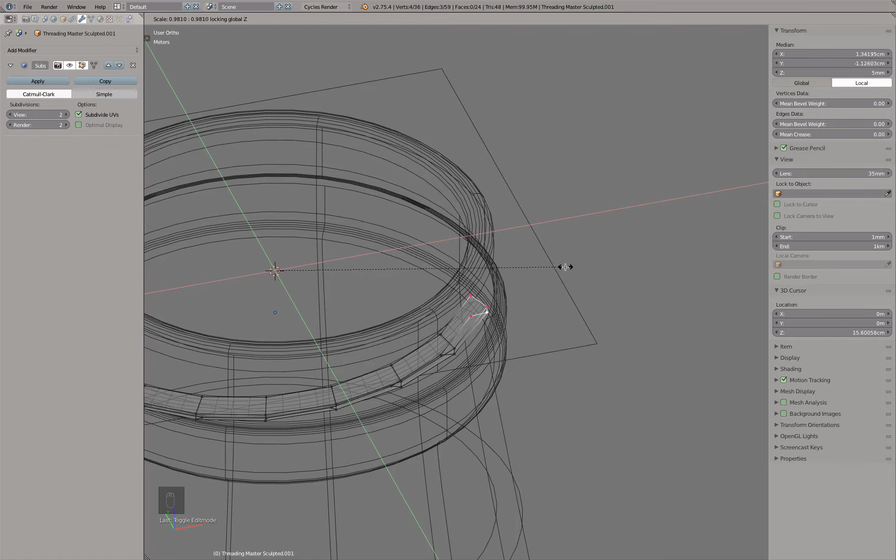And then I can press S, Shift Z, so I do not scale along the Z axis, but just X and Y. And then I can scale to the center of my bottle along X and Y, till, for example, the end of that part is inside my bottle.

And that basically was it. And you see, you really want to nicely overbuild. Otherwise, later Fusion will have some issues when surfaces touch each other and they sit on each other. They really have to sufficiently intersect each other. Okay, so nicely done. So we need 4 more of those threadings.

Now, there are 2 ways how we can do it. For example, Alt-D, R90, Alt-D, R90, Alt-D, R90. Then we have 4 parts. And I would like each threading to be added to the bottle. I have to have 4 commands to join to the bottle. And this is actually way too much work.

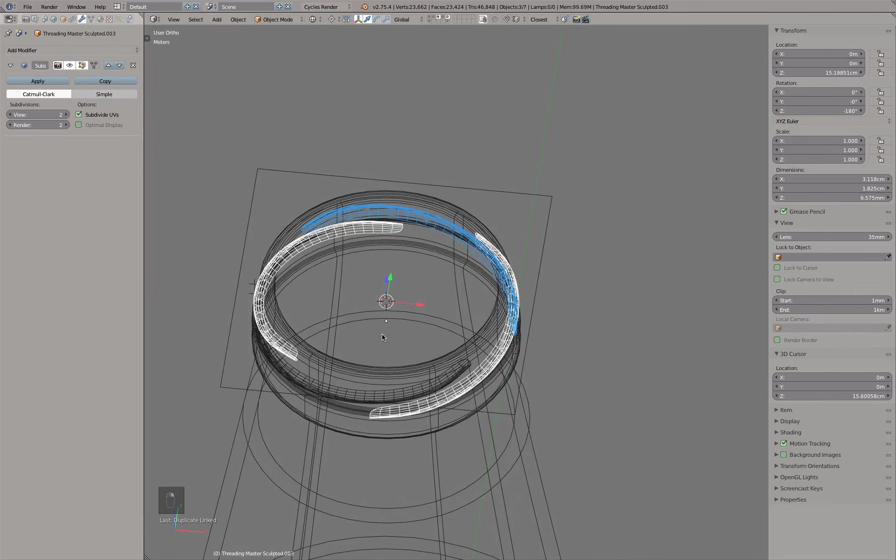So what I'm going to do instead is simply the following. Where this object center for my threading is, Shift S in object mode, and then I add actually a small empty. And yes, I'm going to make a small circular array there, because this object has to be rotated 4 times. So this empty I rotate 360 degrees by 4 steps, so 90. Doesn't really look rotated because it's just 90 degrees, but it is rotated.

So I can click my threading and then add an array, turn this one off, four steps, object offset, this empty, and there we are. And maybe this one here we call empty array threading, so it makes sense. Perfect.

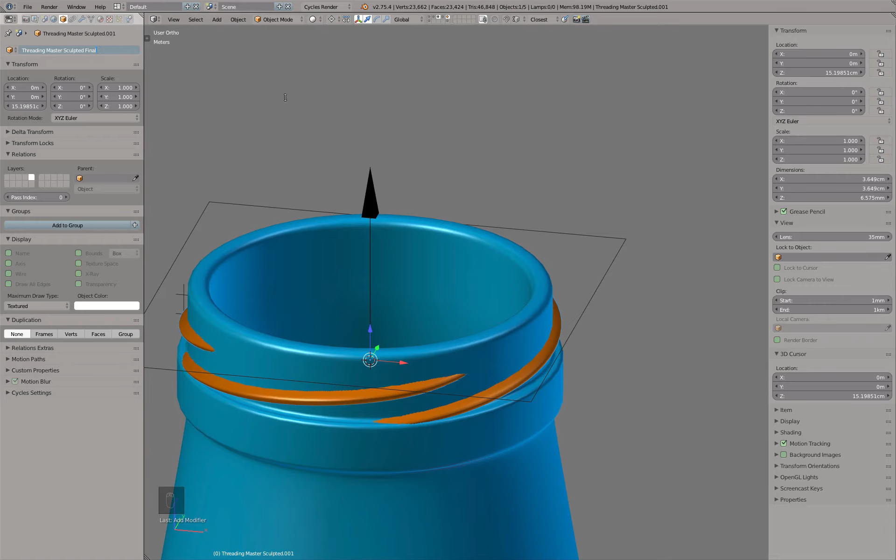And this one is our, for example, sculpted final. So you see now I could go to the bottle and say Boolean union and then type in threading and filter out all the other objects. There is my sculpted final, hit enter, and there it is. This one actually should be on this layer. And that was it. And you see, very easy, just one simple Boolean join command.

Because while you see multiple objects, what's happening is in the end we only have one object. Then we smooth it out and then the array creates 4 more visual copies, but it's still just one object. So all the mesh of this object then is added to the bottle. And that's basically how we make the threading for the bottle.

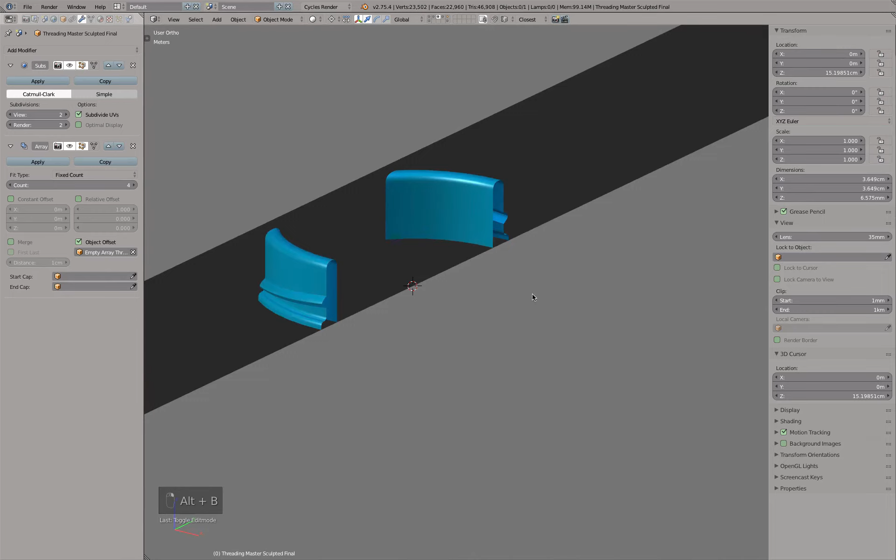So the last step we have to do is now actually to create that compressible material insert for the cap, which we could use to screw the bottle into and then jam the material between the metal cap and the glass so it seals. For a task like this, the best way would be if we could take a look at the cap but only see half of it. But we can't really use, for example, this cut section view because it cuts through everything.

So what we're going to do is we go to the cap there, and for example we add a small cube and then we scale it down there. So now with S, the cube was 2 meters big, so I needed to scale it a little bit. S and Z, this one here I move up a little bit, and this one I move a little bit either behind or in front, but try not to perfectly line the edge of the cube with the center of the cap, because you see this face of my cube lines up with the geometry lines inside my cap.

And Blender is a little bit picky about this one, because also here this object is open at the center point. And in general, it's very bad practice also with NURBS. Short explanation. So let's make a copy and another copy. And let's scale this one. So you should never, also in Fusion or so, when you want to trim parts, let them rest on each other. And the same is true for Rhino, and the same is true for Alias.

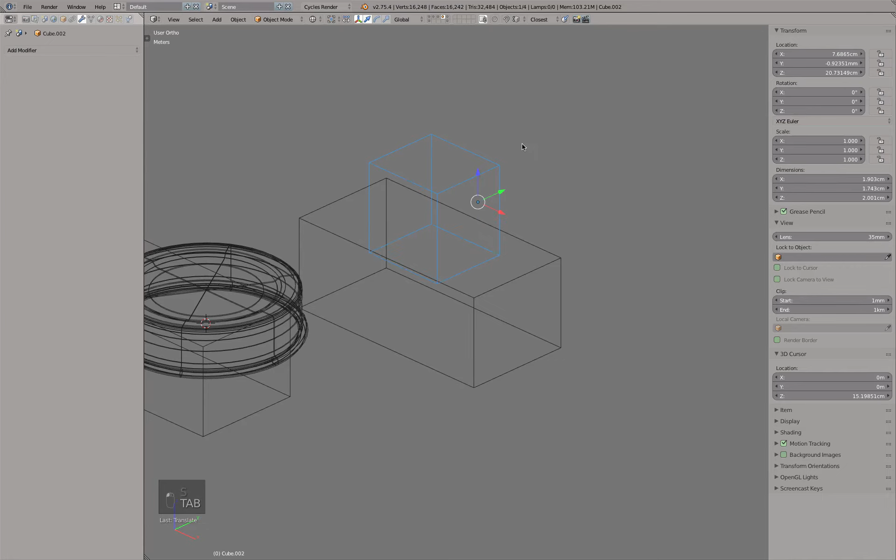It's pretty much very difficult for the software to understand how, for example, this cube should open this cube when the faces, so the bottom face of this cube, sits actually exactly on this face. And for the software, math-wise, it's always easier to do this calculation when there is very clear intersection between the two objects, because then the software can really understand that somewhere around here we have to calculate how these objects are intersecting, and so we can just cut all the other stuff away.

So that was a little excursion about how to best build the stuff. Let's add some visual colors. Again, I use these colors just because I like those two signal colors, and I very often use blue just for objects, and I use orange for geometry that tries to cut something away.

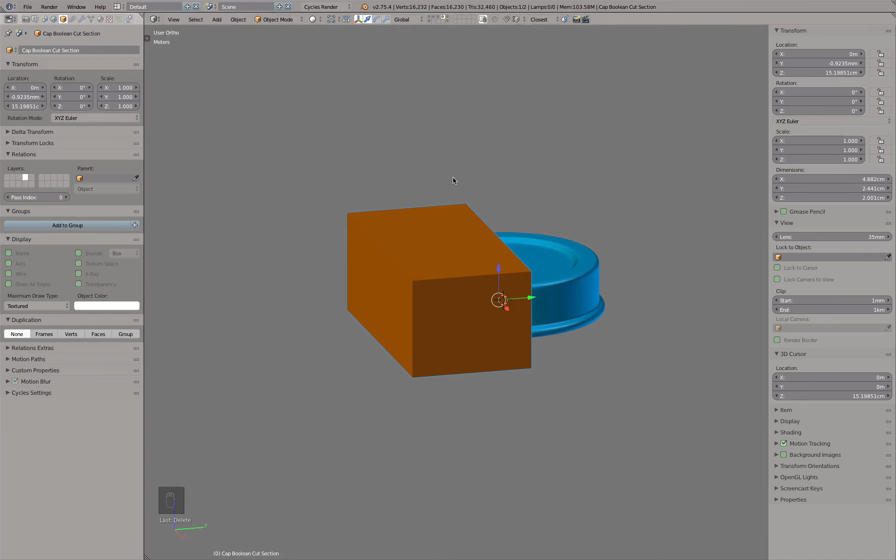This object I call, for example, let's call this one cap boolean. Oh no, wait, yeah, cut section, for example. Okay. And we can move this cube maybe onto this layer, so it's out of our view, go to there, and then we add another Boolean modifier. Let's keep this one at 3. It will take a tick to calculate, but that would be fine. Cut section, there's only one object with that name, enter, and there it cut it out.

Hey, nifty trick. If you want to actually see that cut section material on the cap, you see currently this object has one material, but we can actually add another material to it. So plus, and then Boolean, and over there you see it actually takes the material from the Boolean object, which has the material Boolean, and adds it to it. The way this works, everything that's orange right now is actually geometry created by this cube, so it can use the material from that cube to render it. So this is a really nice way when you want to see a nice and clean cut section view, and then visualize also by color where you cut.

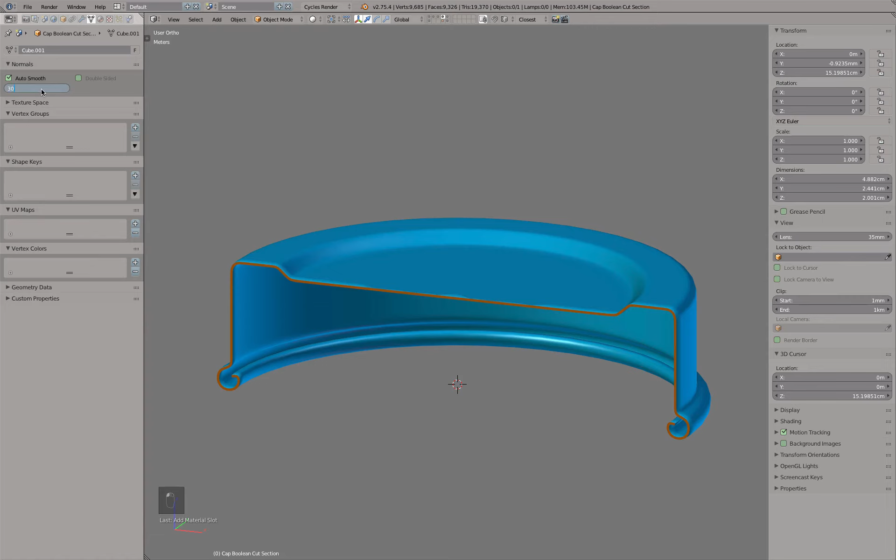So maybe also turn on auto smooth. See, there's a little bit of a shading artifact. I just try to fix it. Oh wait, maybe with 15. Maybe 10. That's a pretty bad one. Okay, well, it's not a big deal. It's just a visual annoyance. It's not really that the geometry is bad.

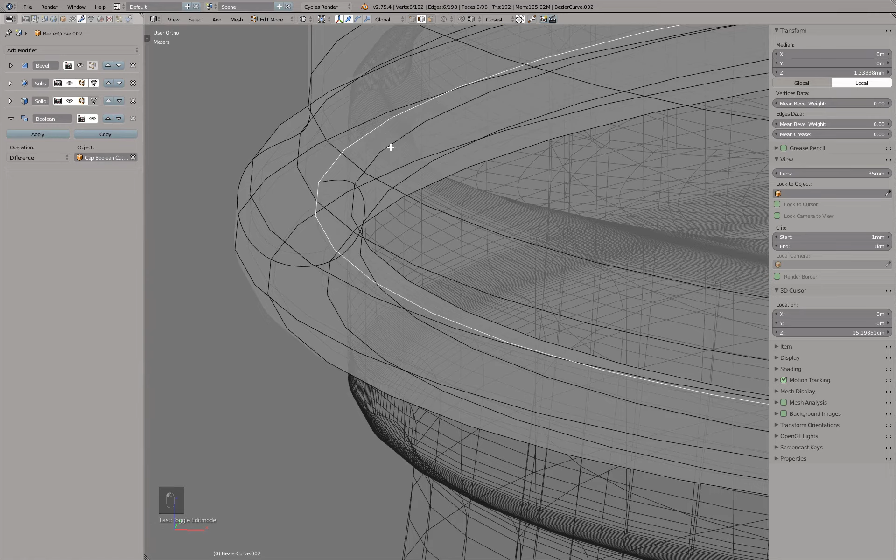Okay, now let's go back to this view. Now you can see what I mean. This is actually insanely helpful, because now I can clearly create and work with the negative space between the cap and the bottle. Also, before we continue, I see there is a problem here. So this actually has to go in a little bit. So this bevel command I remove for a second. This one I apply, and then I have to select. So control click, control click, control click, or in your case, I think it was alt click. And then everything's selected. Top view, alt B, make a cut section view.

There I see how far this intersects, and then S, Shift Z to exclude the Z axis. And then I scale along X and Y and move all this just a tick inwards. I can also select this edge, for example, and then select loop. Even when you don't see the rest of the mesh, it is still selected. So now I could press S and Shift Z and scale it back a little bit. So there's my circular shape. Now it snugs or hugs the bottle better. Okay, and we can release it.

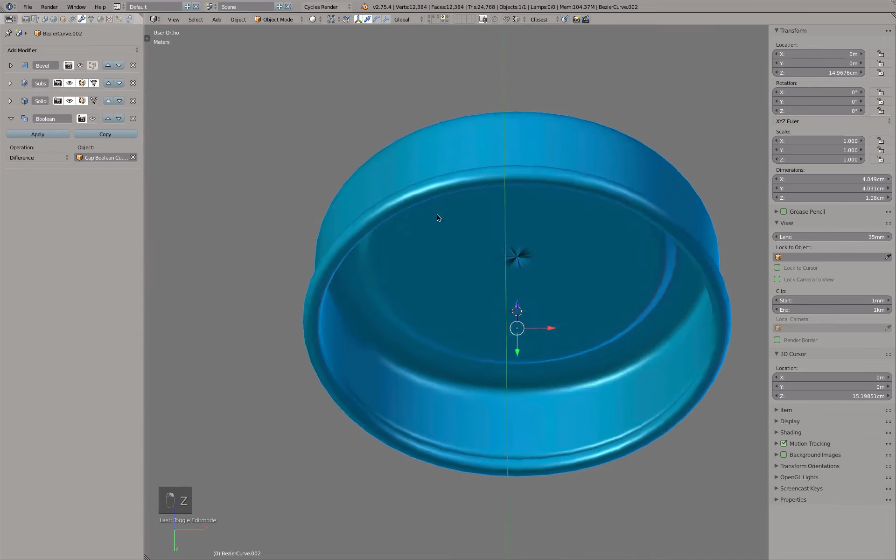Oh, what happened? Let's take a look. That's interesting. Why did the Boolean command actually fail? Sometimes when Blender, or programs in general, are picky with this command, simple trick: always move those elements a little bit and then see if that actually fixes it. And yeah, the geometry was just too close to each other, and that confused the software a little bit. Not a big deal, we just fixed it.

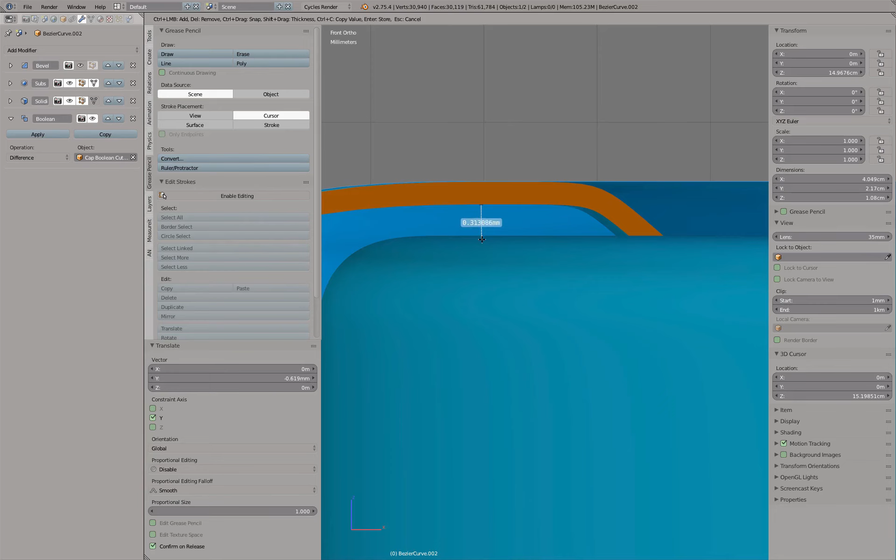Okay, so I would like to see what the distance here is, and this actually looks pretty tight. So I could measure this by going to tool panel, grease pencil, ruler, and then click, hold left mouse button and drag down. Ooh, this is not really much. So maybe at least a millimeter this should go up. So this is actually 0.25. So everything should go up 3/4 of a millimeter. So what I have to do now is select all this. To make this calculation faster, I turn the Boolean operation off, select everything, and then G Z .00075. So you see 3/4 of a millimeter, enter.

Then I can select the cap again, turn this one on. So why do you do this on and off? The thing is, Blender constantly re-evaluates those functions. So even when I just move it a tick, it instantly updates it. And if you want to move it more, every time you move the mouse, it just recalculates. Can sometimes be very helpful, but sometimes also quite annoying. So that's the reason why I simply turned this one off. And let's take a look now. Wrong layer. And let's go to the ruler.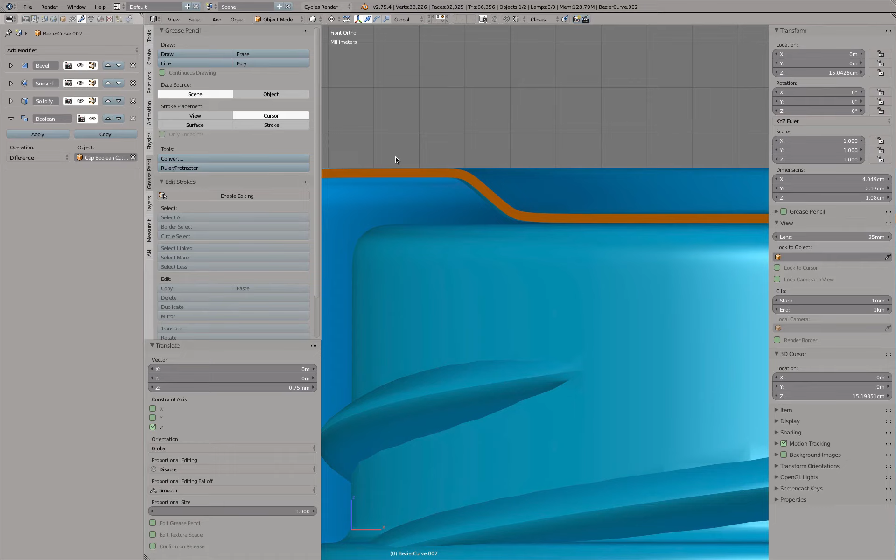Yeah, kind of like a millimeter. Okay, good. Escape, T, and save. So now we can build

This kind of like the silicone or compressible material insert. And we don't really, with this bottle, have to build an opposite threading. The nice thing is we just build a volume that basically would be pushed or glued into the cap, or glued onto the cap inside. And then the threading actually will be molded in a way that there's just a cavity for this threading to go into. So this actually makes this step very, very easy.

And I'm going to simplify this step actually a little bit. So let's see what we can do. Let's try not to be too precise. We're just going to simplify this a little bit, because again, what we're going to do right now would be a very, very technical part. An engineer would probably take more care of it. Obviously, if you want to build it yourself, you have to do it.

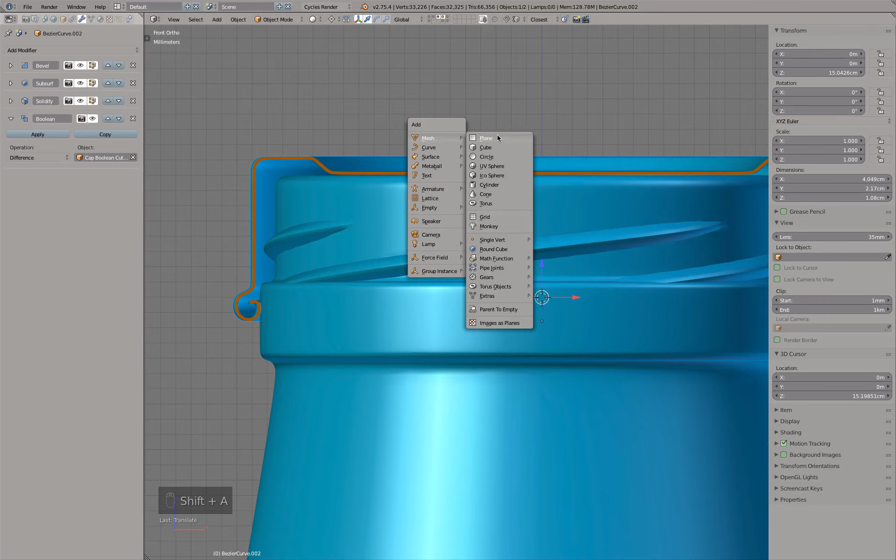So we make a new plane. The 3D cursor is X and Y at 0. Plane. Going to shaded view with Z, tab. RX90, and then, for example, we can move this one over and over there. Okay, and then we can move this one up a little bit, maybe till there. And now I have to match this a little bit.

So you can see where actually the bottle is. So should this really be at the bottle, or should there be a small gap actually? And obviously we want to have a small gap. This one should come down and actually should sit on its notch. And you see I used actually the snap tool. So GZ, move it up, and then hold Control key and snap to these parts. Perfect. Good.

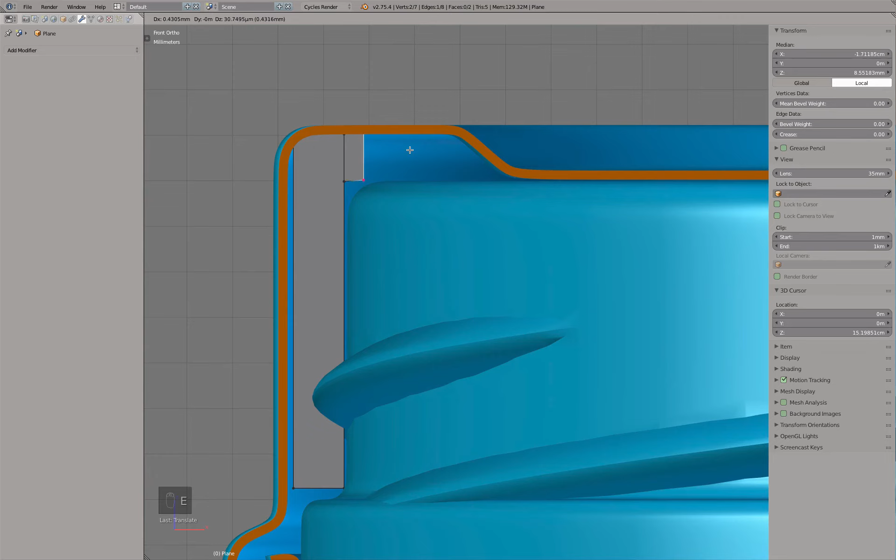This edge actually we could subdivide, because then there I have a new point, GZ, and maybe try to see if we can find a point up there. Okay, good. And then select these 2 points, E and X, and maybe for the moment first move it over.

Okay, so this internal edge, for example, we would like to remove. So I delete the edge, and then this point, I'm going to turn this one to X-ray so you better can see it. I will simply dissolve, and that just removes the point. Okay. Now this one I move a little bit further, and for example, as you can see, I'll try to match a little bit that angle. Okay, good. That I like.

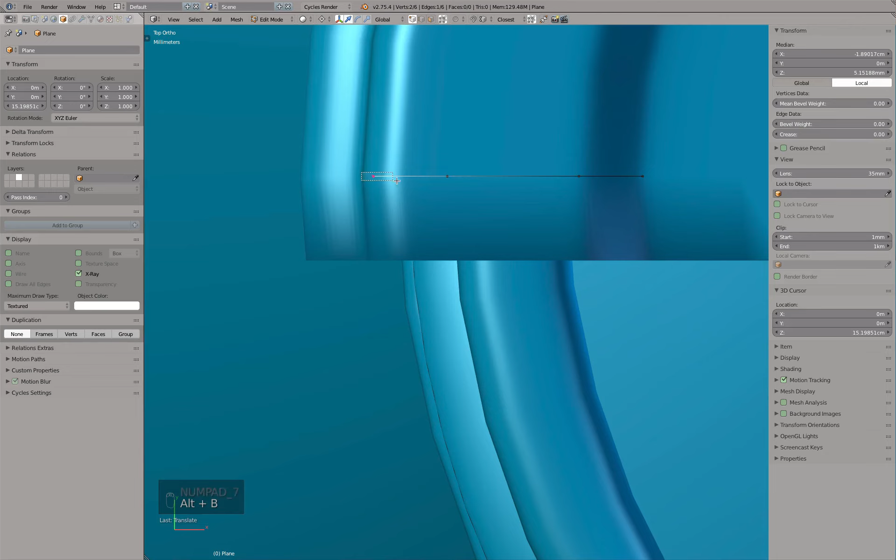So let's see what the next step could be done. So this and this one, G and X, I have to snap actually onto that surface there, and I think maybe in this case we do a cut section view of this part so I can see if it really lines up, and it does indeed. So if you go into shaded mode, you see actually there is a geometry. So I can actually G and X and then snap to that wireframe model. And then this way, this edge actually rests on the inside of my metal model. Perfect.

Good. This one maybe G and X a little bit over, G and X a little bit this way, and looks like this is actually a tick too high. Now for compression actually, at least up here, this piece will be a little bit bigger, so the bottle will, the volume actually will press against it. And here we also see, for example, where's the opening. So question now is, do we really need actually to go over till there?

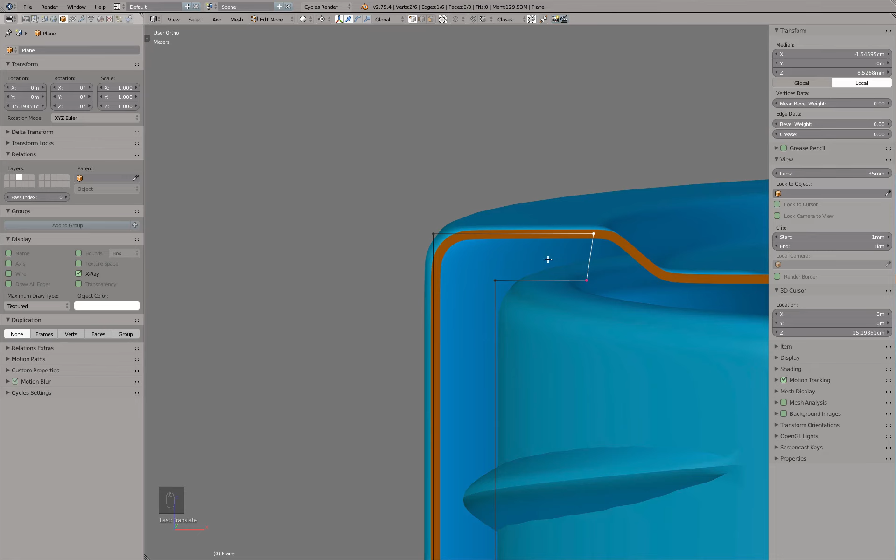Or we could maybe there. So we have this edge and this edge to glue onto, and then here we will have material where actually the glass will press against the compressible material and create a seal. And maybe to make this one a little bit cleaner, we simply, S X and 0 with the bounding box, line these 2 points up and just keep it this way. Okay, good.

This looks pretty good. So this part actually I'm going to move on to the layer for my cap, because essentially this is part of the profile area. So where's my cap? There's my cap there. And then, for example, we could create a screw modifier

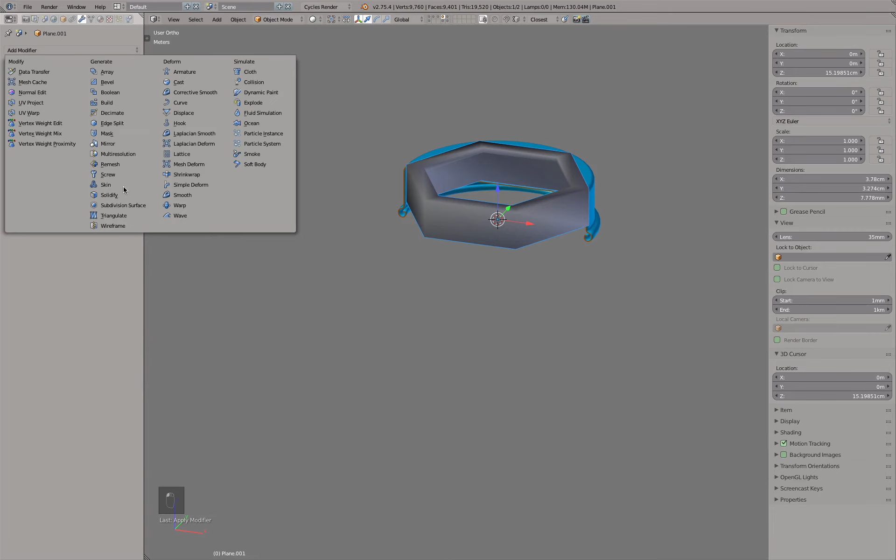there. Okay. For example, here again we use 6 steps. I make a copy, Shift D, and move it to the 4th layer. There. And then we will apply this. And then we will add a subdivision surface modifier, and everything will look very soft and round. And that's fine, because

What we're going to do now is actually the following. So this edge we have to bevel. So bevel, this one actually we crease so it's tight. This edge down here, for example, we have to bevel. This edge we have to crease. Crease means we sharpen it. And this edge down there, maybe, yeah, let's crease it for the moment. And then this inner edge here, that one we also have to bevel. So you see with the creasing already, this is pretty sharp.

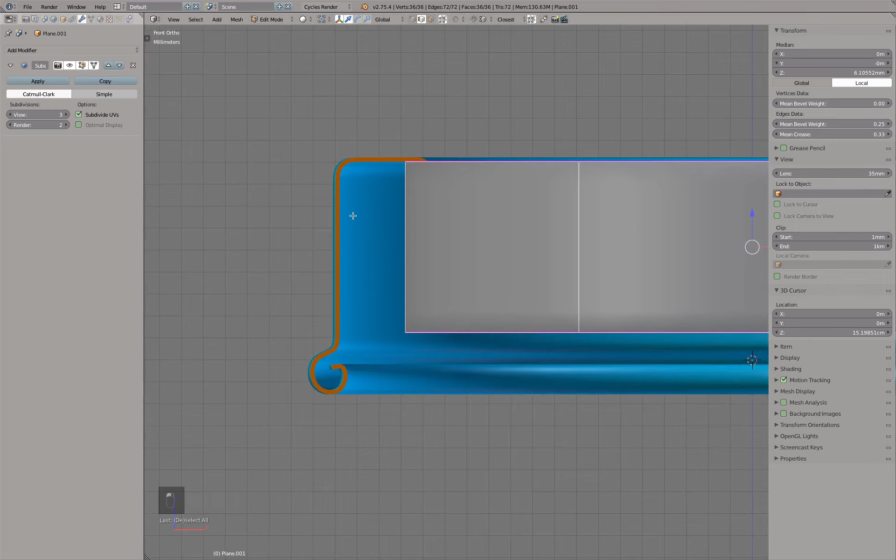Actually, for the moment I creased this one as well, because what we have to do first now is AA, select everything, maybe project the mesh on it, and then S and then Shift Z. Let's quickly scale it back.

Cut section view. S, Shift Z, and then maybe in this case here we have to eyeball this for a moment. S and Shift Z. There, these lines overlap. Okay. Good. Perfect.

So, what was all this about? Let's bring this one back. Also, this currently looks kind of wonky because I still have this X-ray on, so let's turn this one off. And now

We will add a Bevel modifier. Move it to the top, but only to the weight. And what value do we have here? 1 millimeter. Okay, so this shrank a little bit, so it can't be 1 millimeter. But maybe let's start with it. And how many steps? 5. So let's try to match it. 5.

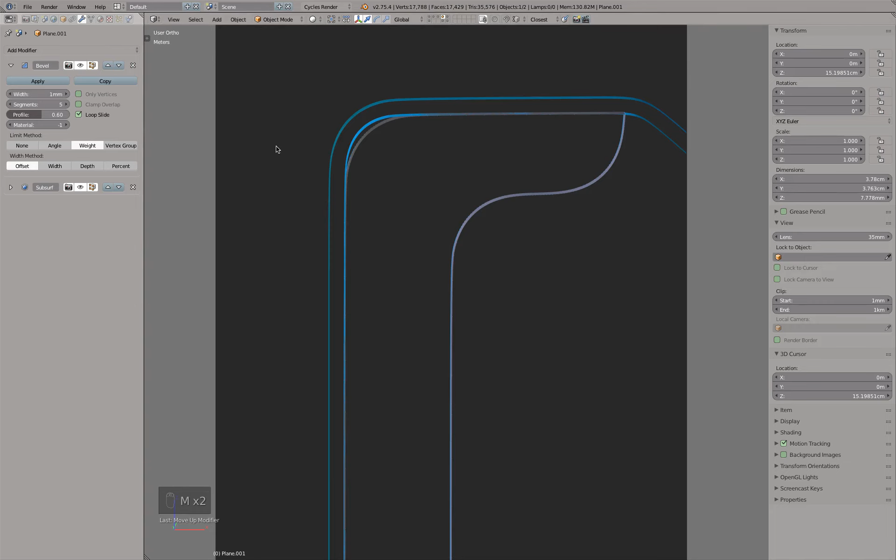And then this again is actually a pretty good situation where the cut section can work really great. So 0.6. Also then here 0.6 there. And then maybe 0.9 millimeter. 0.8 millimeters. Oh, turn this one off here, this clamp. 0.9 millimeters. 1 millimeters. 0.7 millimeters. Ah, there. So we're pretty close actually to it.

Let's actually take a look at this with the bottle. And this actually doesn't look too bad. So you see like all this comes around, but maybe this rounding here is a tick too big. So we could actually then select this ring and then change the value, for example, to 0.5, which means 50% of 0.7 millimeters. And you see that already is a lot smaller.

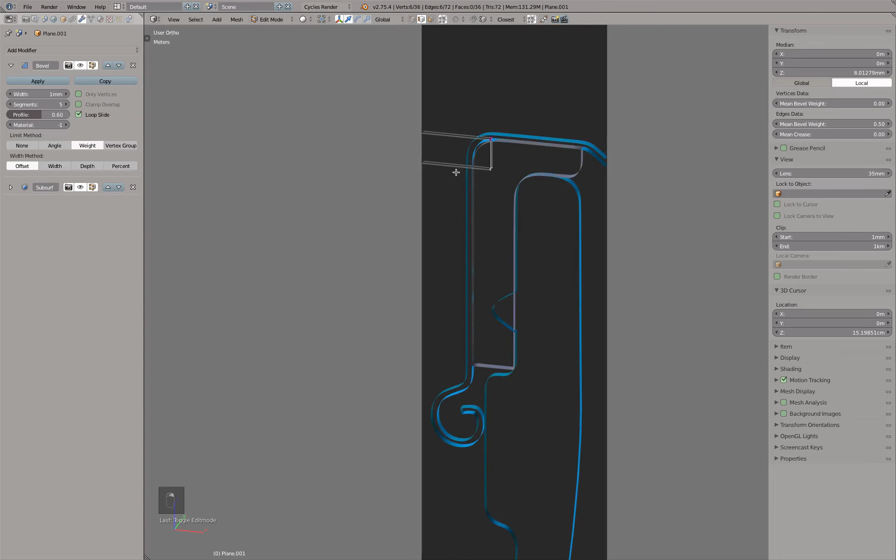This is actually okay. So I'm curious now, actually, hold on, 1 millimeter. So 1 millimeter actually makes this one nearly perfect, but then this actually is too big, which means then in this case, let's try to find this edge, this one, there.

And then let's go back to the cut section view. We simply then adjust the weight here, via percentage, like 10% down, 8%. Oh, you see there it gets closer. 0.7, too much. 0.75. Yeah, there's a little bit of a gap, but you know, you also need to have the glue material in between. And for like a quick concept where there's a visualization, this is perfectly sufficient.

When we would render this one, obviously these two shells would intersect, but because the cap is metal, for concept modeling, this is fine. Okay, let's save for the moment.

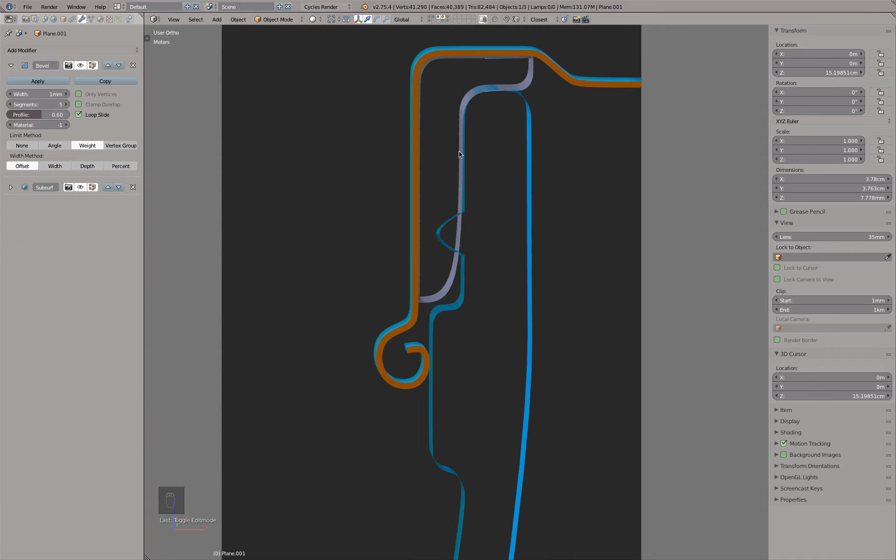And then let's take a look at this, because this one actually is creased. We don't need this to be creased. And I'm curious now how this actually looks for the threading. So yeah, this comes down. I think actually this maybe could do it already.

So let's call this one cap insert. And what we have to do is know the threading. We might actually have to cut out of this insert. So I have to see to make sure that, for example, the orange surface of the cap is always outside and then cuts into the cap insert object, but that those sides still stay outside.

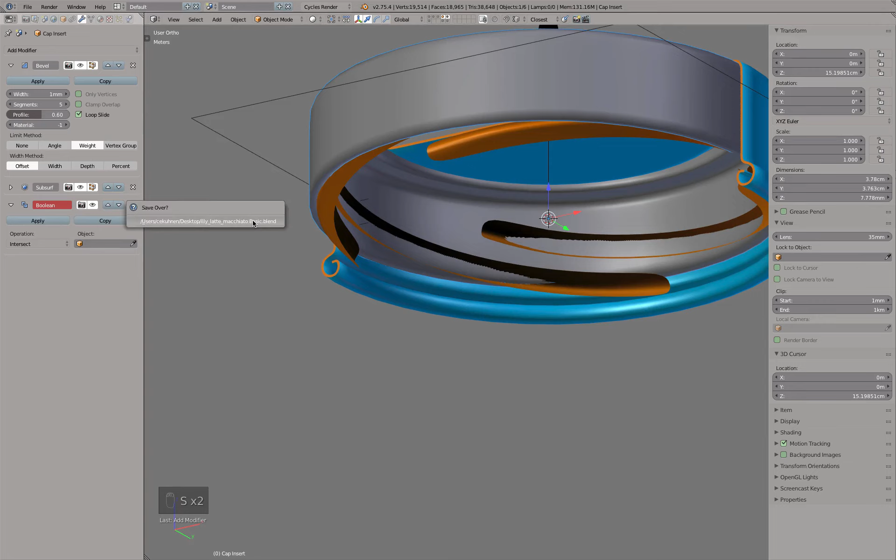So you see actually there is a clear shape. And think about the orange object, the threading, like a knife we're going to use to carve something out. So we can select the cap and then Boolean. Let's save. And in this case, difference, because we do not add actually the threading, we simply cut it out or cut it away. There.

Let's take a look at the threading. And this is actually fantastic. Let's change the shading a little bit. You see there are a lot of artifacts. This is just a visual artifact. It's not that the geometry is bad there.

And what I was looking for was that here where this is round, we have a very easy entrance for the threading to go in. What does this mean? So let's say we make this one a 1. Okay. This could maybe work as well, actually, the way how I build it, but you might have to force the cap a little bit over the start of the threading.

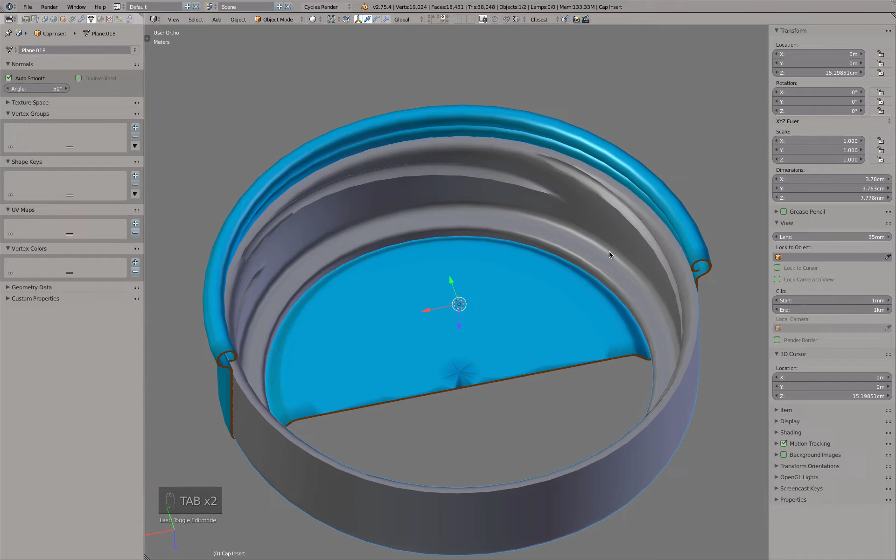So it's not very comfortable, and that is why, for example, I soften this edge by not creasing or not beveling it, and then we will have a better thinner area here, and the threading will better slide onto it. So let's also give this a material.

So if, for example, we would like to see also this with a cut section, we can do the same. So first, let's actually name our modifiers correctly. And then maybe here, different cut section. And we can use actually the same cut section object for the cap.

And there we see now kind of like the fruits of our hard labor. Maybe let's add also that other material so it's easier to see. Perfect. How awesome is this? Okay. And now there we have also the insert for the threading and the cap.